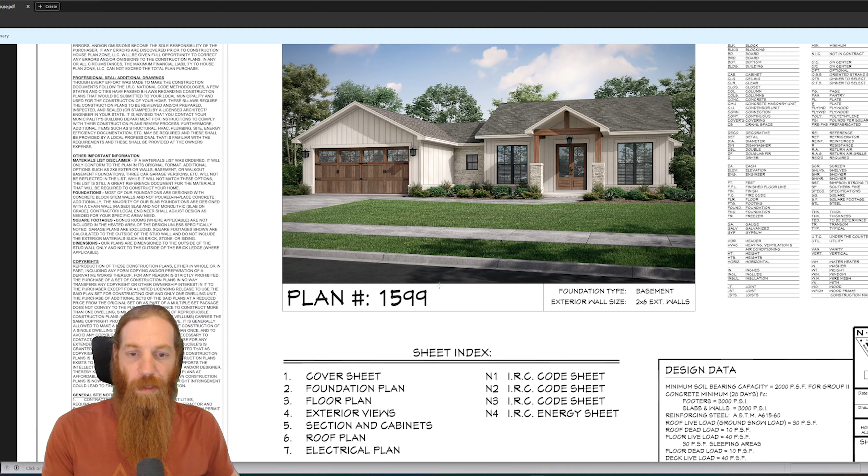That's the other reason I like building all this in SketchUp before actually building it for real—I'm able to make or identify any changes I want to make to the floor plan ahead of time. For this particular home, it's got a bump out on the side for the bathroom on the main floor. Let me go to the floor plan here—you can see it's got the bathroom with the tub essentially inside that bump out.

I'm not a huge fan of that. I mean, it adds a little bit of depth architecturally to the side of the building, but I'm not real concerned—the side of the building is usually going to be covered up with landscaping, bushes, trees, that sort of stuff anyway. And it's going to be a lot cheaper for us just to build that as a flat wall.

So that's one change I've already made. Instead of doing the bump out with the foundation, this is going to be a straight wall, coming all the way out to the same distance the bump out goes to—a total of 61.5 feet from one end of the building to the other. So we're going the full 61.5 feet corner to corner. This will all be a flat wall, meaning we'll have a little more space on the interior, which is always nice, and it'll be a little cheaper to do the foundation since you don't have those corners to deal with.

It's simpler for framing the floor, simpler for framing the walls, simpler for just about everything. So you're reducing costs there by actually going a little bit bigger, which is really nice when you can pull that off.

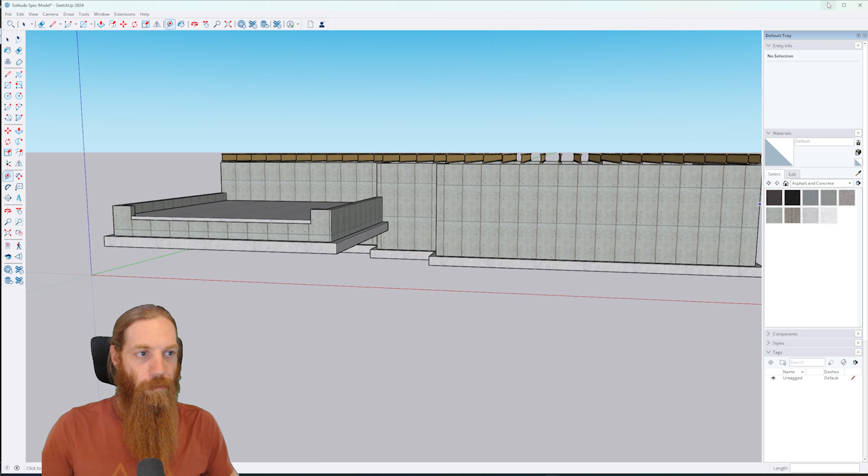So with that said—last time we were doing this, oops, wrong one—last time we got this far. I basically showed exactly what I do for the foundation here to get started. Just like in the real world, when building a house virtually, I think it's best to start with the foundation, because everything gets built on top of it. So that's what I always start with.

We've got our footings in here, as you can see. The garage level is going to be a different level than the rest of the home because this is a basement foundation—we're doing 10-foot ceilings here. So you can see we've got our foundation walls. We have the slab on the inside for the basement, and we also have the slab in the garage.

The garage has its own little stem wall, its own footing, and then of course the slab there. We didn't model out any of the rebar - I may come back and do that later. When I'm just getting started on a build like this, I'm trying to get an idea of the rough layout. I don't want to spend a lot of time going into details like rebar placement, anchor bolts, and those kind of things. Those details are best done towards the very end once you know for sure what your foundation layout is, because this still might change.

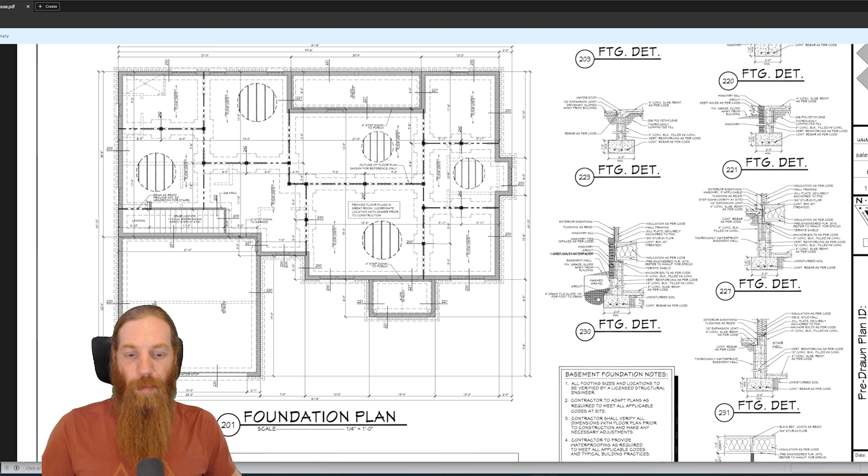A perfect example of that is that so far we do not have the bump out in the back, or I guess a bump in, for the foundation for the back patio. Let's go back to the floor plan. You can see right here they have this wall coming all the way across, a little stem wall that they do, and then all this was going to get poured in for a slab for their back patio. I'm not going to do a slab patio.

As you can see, we are building this up higher out of the ground. The grade level is going to be essentially where the garage slab is, so our main floor level is going to be a good 4 or 5 feet above grade. So I'm not going to do a poured concrete patio in the back. Instead, it's most likely going to be a deck that I will extend out further than what it shows on the plans, making a nice covered porch or deck area with a gable roof over top.

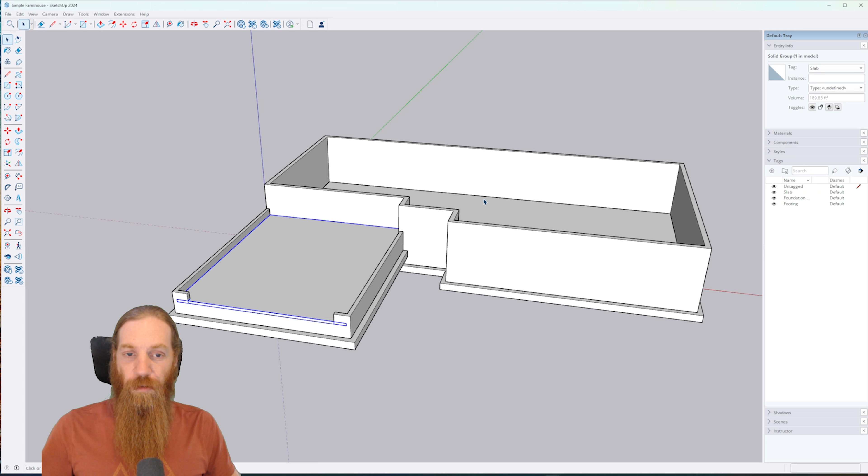We'll work on all that later, but we still need to fix this little foundation part for the floor plan. We do need to follow this part that bumps in, because that's essentially the exterior wall of the home. We could switch that around and add more interior space here, but we'd lose the patio there. I kind of like having a little inset patio area on builds - I think it's a nice feature. So we're going to keep it, but we need to fix our foundation wall to include that little bump in. So we need to get our measurements.

First things first, let's go off this corner over here. We're going to come over 12 feet 2 inches. I hope you guys can see that okay - it's a little small, let me zoom in a bit. I think that's better. We can go in a little bit more there. Okay, so you can see I got my measurement here on the plans, 12 feet 2 inches. So I'm going to come in 12 feet 2 inches from the outside corner, and that'll go to the outside corner of the foundation wall where it bumps in.

So let's go back to our model. We're going to pull out the tape measure by pressing T. I'm going to measure from the exterior wall - we're going to come over 12 feet 2 inches. If you didn't see the first episode of this series, go back and watch it. I explain a lot of how to use the simple tools like your tape measure, line tool, and the stuff we used to build this foundation and get it started. I explained how all that works in the first episode, so I'm not going to go into as much detail here.

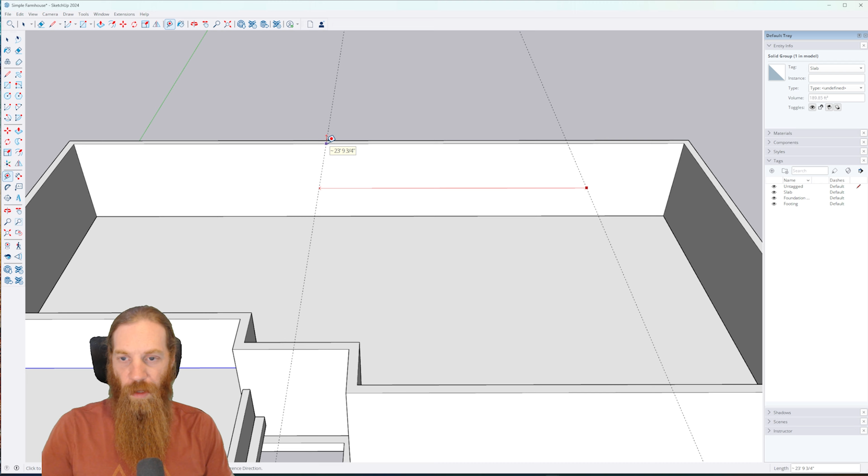Okay, so now let me go back to the plans. Let's just take, so 20 feet 4 inches, we need to come over 20 feet 4 inches across, and that's going to be the interior dimensions for that little bump in. So what did I say, 20 feet 4 inches, right? Let me see.

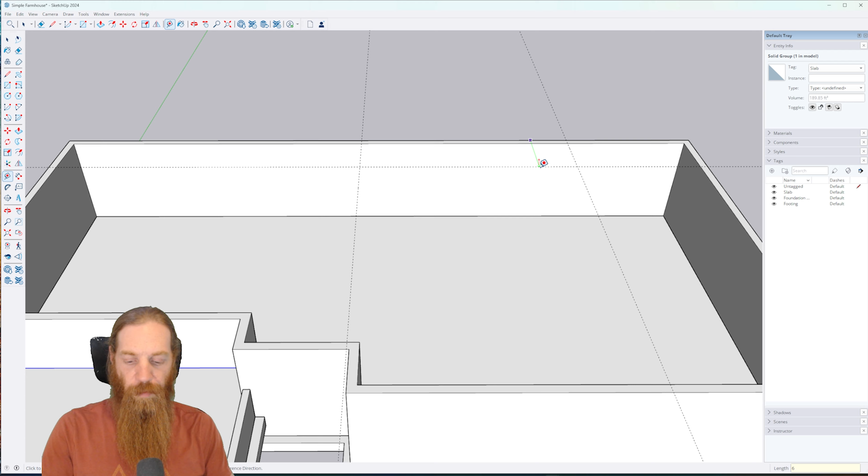20 feet 4 inches. Now the depth of it, or the distance that we're coming in, is going to be 6 feet from the outside of the foundation wall up here to the outside of the foundation wall down here. So we can go ahead and do the 6 feet there. From the outside of the foundation wall, we come down 6 feet, and that's going to give us our dimensions for this little bump out section of the wall.

Now, in order to actually change this, we're going to come in here, hit the line tool. We're going to connect it to our marker that we put on there, our reference line. And then we're just going to follow the blue axis down, so you can see it snap to the blue axis because the line turned blue. And then we're going to bring that all the way down to the footing, actually, is what we want.

So I don't remember if it's default or not. You can see I can hide the slab and actually the footing as well. It'll hide everything that I'm not currently editing. So right now I'm editing the foundation wall because I double clicked on it to go into edit the foundation wall. You can tell because if I hit P for push pull, it highlights that whole wall surface, meaning that I'm editing the wall itself.

So what we're going to do here, I don't remember what the default key bindings are. I may have changed them slightly, but mine is set to Control Q. It's for hide. Let's see if I can find it real quick. I never changed these things. I think I set this up when I first started. Hide is H, but that's not what I'm looking for. So let's go to File.

Do we have like preferences or something somewhere? Okay, one second. Let me see if I can find it, and then I'll be right back.

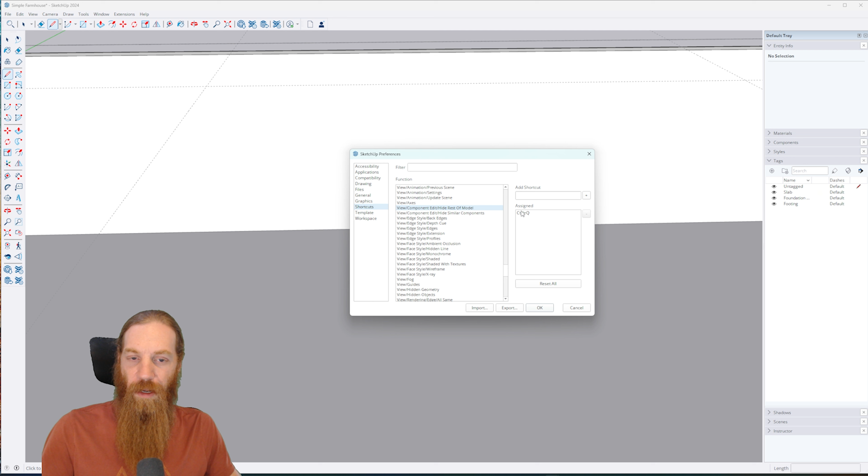You can see I assigned it to Control Q. So anytime I hit Control Q, it'll toggle that option. So let's go ahead and hit OK there. So right now, let's go ahead and get back out. I hit escape, I'm all the way back out to the main model, so I can select the different things, I have the slab, the foundation wall, whatever. So double click on the foundation wall. Now I'm editing the foundation wall. I hit Control Q. It hides everything else except for the foundation wall.

Now the only problem with this is I made my reference marks out here in the main model outside of the foundation wall. So in order to see those marks, I need to place the start of the line there before I hide everything. Now I'll hide everything, bring it straight down following the blue axis. Okay, and then unhide so I can see the reference marks again.

I'm gonna do the same thing over here on the other side. Hide everything, snap it to the blue axis. Where is it? There it was. Whoa, way over there. Okay. Sometimes the camera perspective can make things look a little wonky, so it could take a second to find the axis that you're trying to snap to. But anyways, let's go ahead and do that.

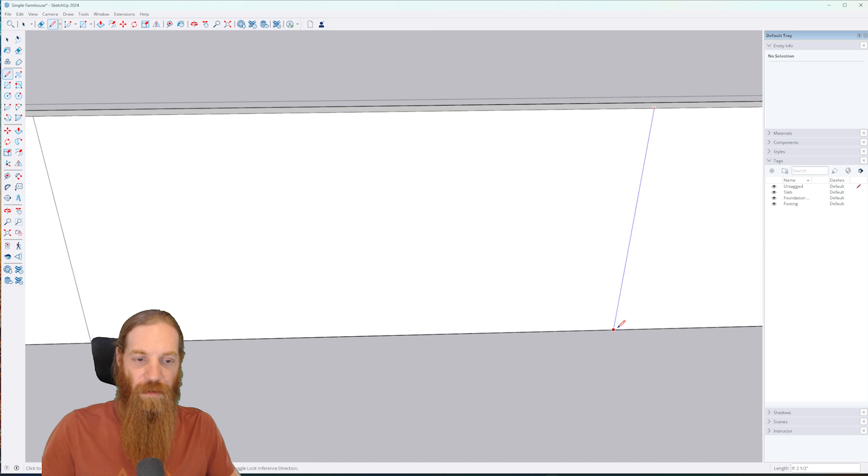Now we unhide everything, and we now have our exterior of the concrete wall for our little alcove that we're doing here. So what I need to do then is come 8 inches over from that, right? So let's come 8 inches over on the red axis, because that's the thickness of our concrete wall.

And we're now going to add another line, and we're still editing inside the foundation wall. So if I press P, you can see it highlights those, meaning that I'm editing the foundation wall itself. So I'm going to do a second line on each side. Oops, let's undo that, I forgot to hide everything. And this time I made the reference lines inside the foundation wall model itself, so I don't need to unhide in order to see those reference lines. Now I can unhide everything.

We are going to now use our push-pull tool. You can see that because we divided those sections up, we can now pull just the sections that we want. So I'm going to pull it out to there. Now that is the exterior of the wall, so we need to go another 8 inches to get all the way to the interior.

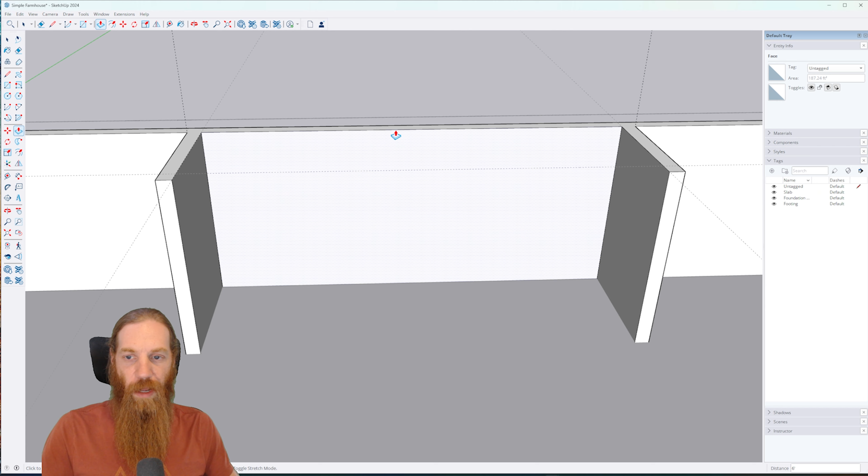Now when I pull this one, I could type in the measurements just like I did on the other side, or what I can do is put the cursor over here on this one, and you can see it's going to bring that one out to match whatever the distance is for the face of this one where I'm putting the cursor. You can also put it on the edge, and it'll match that edge. But anyways, it's just a way to speed things up a little bit when you're trying to match the same distance as something else. So we click on that, and now we have both of our bump ins from the foundation wall there.

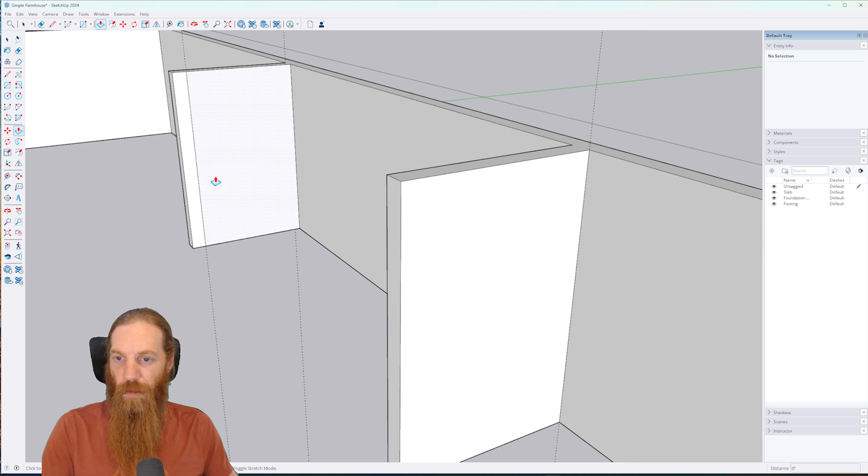So we need to do one more. We're going to go 8 inches here for the thickness of the wall, and we're going to press L for our line tool. It's going to snap on right there. We're going to hit Control Q in order to hide everything else, bring it all the way down to the bottom of the foundation wall. That's very important because that completely divides the sections and allows you to grab just that section with your push-pull tool. So now we're going to pull that out, and again we're just going to go straight to the edge or the face of this piece of foundation wall here, so that it will match that.

So now we have our complete foundation wall for the inner part. We can go ahead and delete this line on here because that's not needed anymore. I always just go ahead and look for other little lines that are left over that I don't need anymore to delete, because the cleaner the model is, the easier it's going to be to work with going forward. When you get a whole bunch of random lines and stuff in your model, further down the road, it could become more complicated for editing and adjusting things. So that was the only one, I kept going when I should have stopped.

Let me zoom out a bit. When you get something like that and you're too close, just zoom back out, and then you can move the perspective back to where you want it.

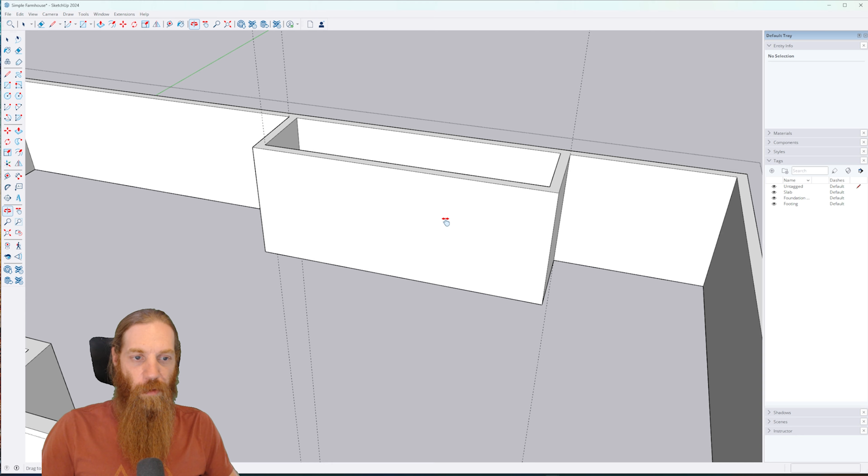So now that we have that, the other thing we need to do, let's pull our line tool out because we're still editing the foundation wall. So line tool, we need to remove this part of the wall out here. So we're going to follow the green axis from each of these points at each corner. That's going to separate that section out, and then we can just lower that on down.

Now, what I think I'm actually going to do here is we're going to leave this as a stem wall. Well, let me think. Would that be better than doing piers?

No, we're not going to leave it because I am probably going to go ahead and build it with a deck that extends out like another 12 feet or so from that exterior wall. So we're going to go ahead and remove this completely. Do not need it. We're going to go ahead and...

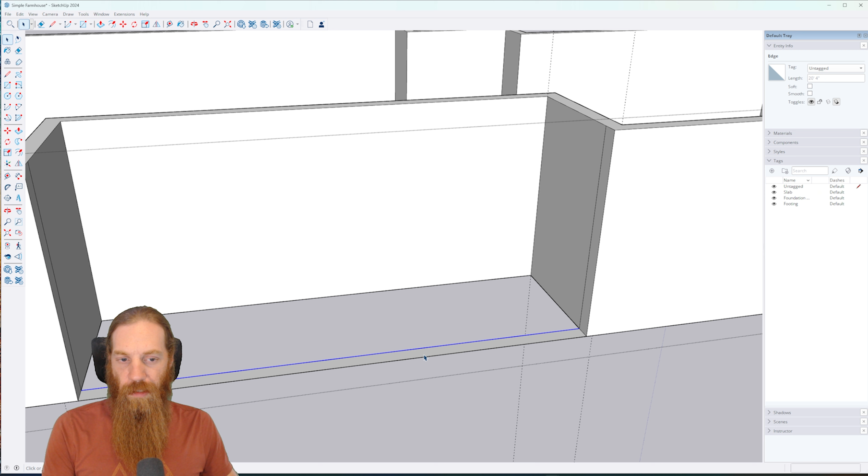So we went all the way down to the bottom, but it left a little bit there for some odd reason. Usually when you go all the way down, it will remove it. But anyways, we can also remove it just by hitting spacebar for our cursor. Click on one of the edge lines there. We will delete that. You can see it's only deleting the cutout part, so we're okay there. Same thing with the other line. It automatically deleted the face area between the two lines once we deleted one of the edge lines. And so now all we have to do is delete the other edge line, and that section is completely gone.

And now, just like before, I'm going to clean up this model a little bit. If I can get my cursor in there, I'll just delete these lines as well because we don't need those. Okay, so now we do have the alcove built in for the back porch area.

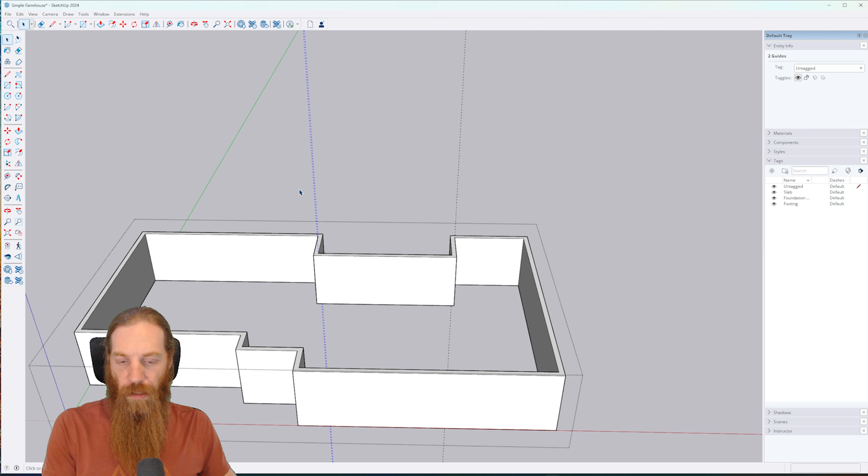And then let's just go ahead and delete these reference lines. We're not going to need those anymore. Hit Control Q to unhide all the rest of the model that we still had hidden. And then I'm just going to click outside of the foundation wall. We're going to go ahead and delete these, we don't need any of these anymore. And there we go, the slab is the only thing left. Well, and the footing, so now we've got to edit those.

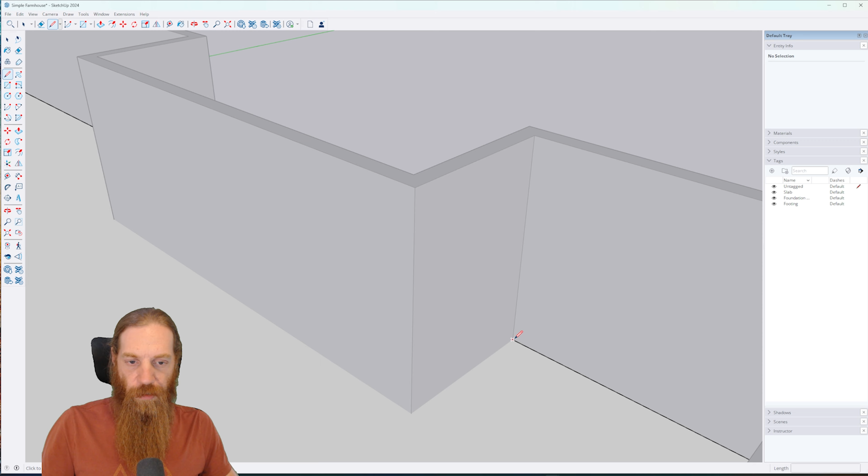So let's go ahead and go into the slab by double clicking on it. And again, I'm just going to take the line tool and follow the outline of this alcove. Click onto the corner, I can't tell if it's getting in the corner or not, I'll zoom in a little bit. There we go, right there. And then bring it out to there to connect.

And then all we have to do is come over to this side, press P for push pull, and push that down. When it says offset limited to -4, that means you've hit the bottom, and it should just go ahead and remove it as soon as you click on that. So now that is completely removed. We can look at just the slab and you can see that it's no longer there. So we're good on that.

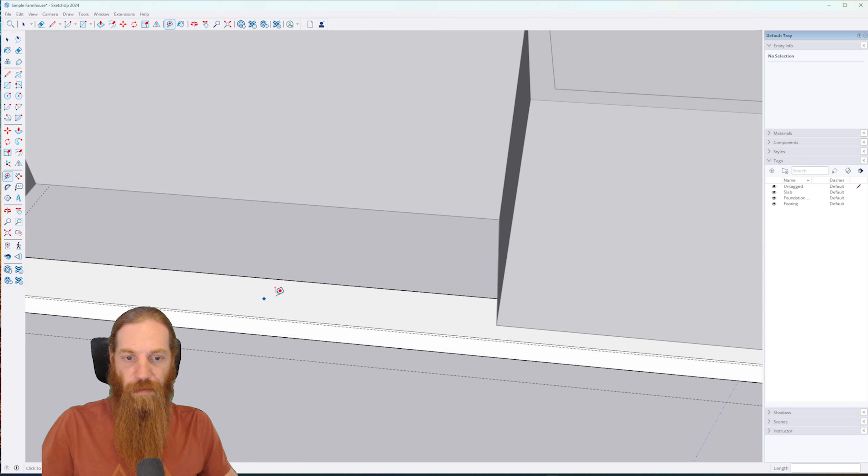Now the footing, we do need the footing to come out. So let's double click on the footing to go in. This needs to come out 8 inches because we had 8 inches of exposed footing on each side of the foundation wall, so we're going to come out 8 inches on both sides. And then we're going to use our line tool just like before and draw our line across there. Same thing right here, draw the line across.

P for push pull, and we're going to... wait a second, why didn't it remove it? See, it's weird, sometimes it says offset limited so it should remove it, but it did not. So we're just going to do what we did before, we're going to delete, and we still have all the rest of the footing there, which is perfect.

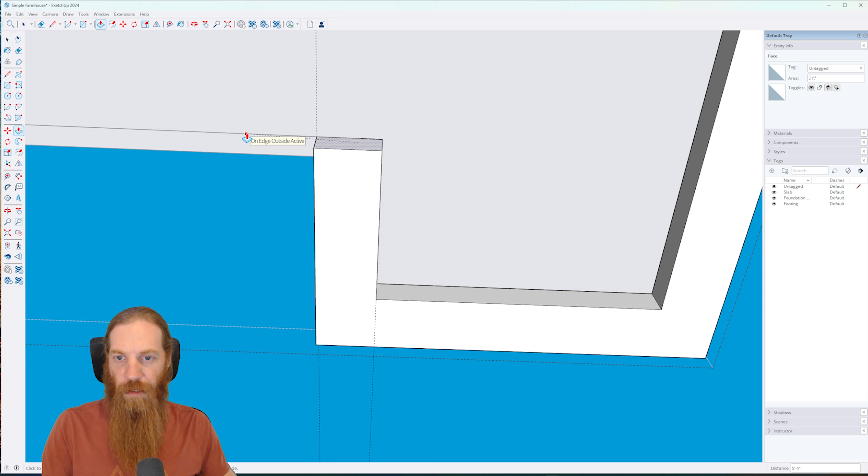Now we need to bring this out. So what we're going to do, we know that these footings are 24 inches wide, so from the end here I'm just going to go 24 back, and we're going to put a line right there. And then we're going to push pull, we're going to pull that out. So we want to go all the way to the edge, the inside edge of the foundation wall. And then we're going to go another 8 inches past that, right? Okay, and there we go.

And then let's go ahead and do another reference line straight across here on the green axis, and we're going to go 24 inches again. Hit L for our line tool, draw the line there, and then P, push pull. Okay, and we need to bring this all the way down to here, and then another 8 inches, just like before.

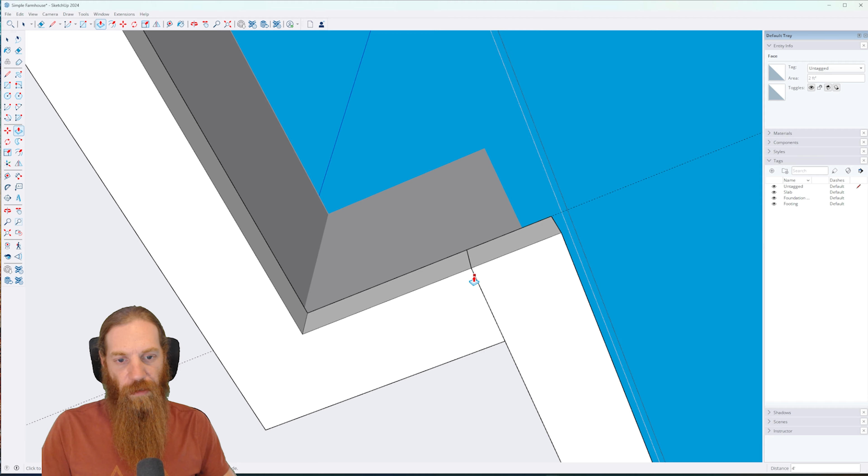Okay, and now we already have our line here, so I'm just going to use that same line. We're going to do our line tool coming down from that to give us our 24-inch wide footing there. And then we're just going to push pull all the way to the edge of this one by clicking it onto the edge of this footing over here, basically. You can also turn the camera angle around and tell it to go to the face of that footing, and it's just going to match where that is, and you can see it automatically merged with that footing.

So now we hit spacebar for our cursor. We're just going to select that line, delete, and I think there's just one more line somewhere, maybe not. Nope, that's it. So now the footing is complete under that section of wall just like we wanted it. At this point, we're going to remove our reference lines because we don't need any of these anymore. And there we go, so we've got the footing and the slab and the foundation wall all completed.

We're ready to go. Now, last time I mentioned that the foundation height is going to be 10 feet, and I want to match the height to where I can use pre-cut 10-foot studs. Yes, the basement slab probably won't be exactly flat.

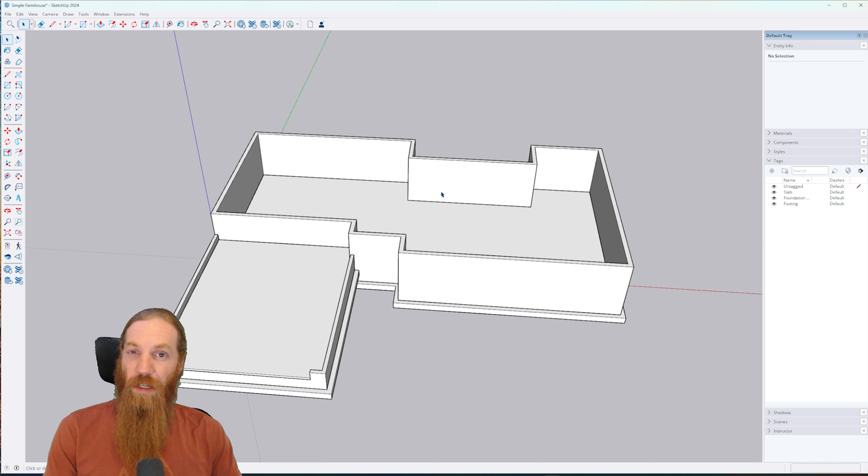You may have some dips in a couple places that throw you off an eighth of an inch or even a quarter inch in some spots, so you won't be able to use pre-cut studs everywhere if you want to keep the top of your wall perfectly level. But for the most part, assuming a perfect environment since we're doing this virtually on the computer...

We're just going to measure out for pre-cut 10-foot studs. If you're not familiar with pre-cut studs, basically they're pre-cut to make the total wall height or ceiling height a certain length. There's 8 foot, 9 foot, 10 foot, probably even 12 foot pre-cut studs. I don't know that I've ever seen 12 foot, there might be, but 8, 9, and 10 foot are fairly common.

Now these studs are not measured exactly — a 10-foot pre-cut stud is not going to be exactly 10 feet, and an 8-foot pre-cut stud is not going to be exactly 8 feet, because they reduce it a little bit. They take 3 inches off for your top and bottom plates.

This does become a bit of an issue because technically you have 3 plates — one bottom plate and a double top plate, typically. So that's a total of 4.5 inches. You should be taking off about 4.5 inches, and they're also accounting for things like drywall and flooring. You want your drywall to be up off the floor a little bit.

You don't want, when you lay a sheet of drywall up on the wall, for it to be tight down to the floor — you'll have a gap at the bottom. So it's accounting for all that kind of stuff. But basically...

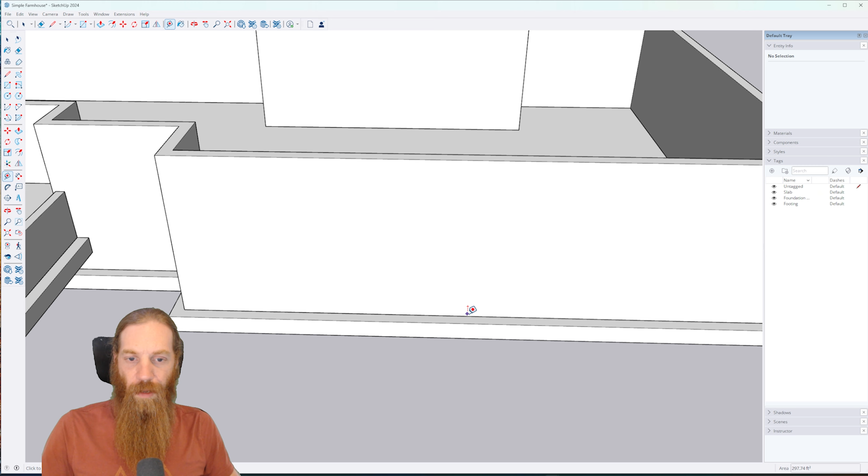I think when we actually did our wall, we want to measure from the top of slab, right? Because that's where you're going to be framing on top of. So right now we have 8 foot 10 and a half. That is not even close to where we need to be.

So we're going to edit that, push pull. Oh, I should probably put a reference mark first, huh? So we want to go up, what did I say? 10 foot, we'll just do 116 and 5/8. Okay, so that's going to give us our stud height. And then on top of that, so let me go to that first.

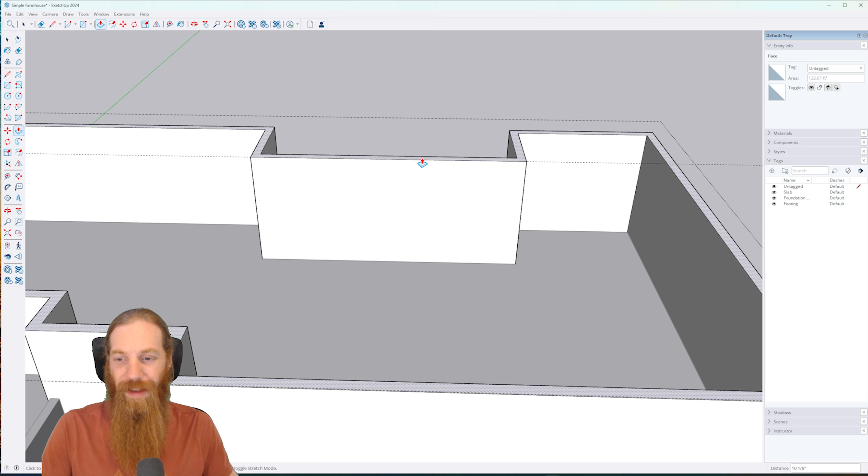So that raises the whole thing up to our stud height. That's fine. Now on top of the stud height, we also want to make sure that we have room for our plates, right? So we're going to have, was I doing a 10 foot on this or a 9 foot ceiling? I feel like we were actually doing a 9 foot ceiling, weren't we? Because now that I look at it, 10 foot is going to be pretty tall. I think we were doing a 9 foot ceiling.

I'm just thinking 10 because that's what the build I'm currently doing is. So let's go to a 9 foot stud. What would that be? Let's just go ahead and put in length, and it'll tell me the exact length. 104 and 5/8. Okay, so let's go 104 and 5/8.

So let me hit Control Z. We're going to back up a little bit here. Take the reference line away. Take out our tape measure by hitting T. From the top of slab, we want to go up 104 and 5/8.

And then from there, we need to add in 3 inches for our plates. I'll explain why in just a second. But let's go ahead and go up. Let's do this. P for push pull. We're going to lower the wall down to this line to start.

Now from there, we're going to come up 3 inches. The reason for that is because we're going to have a sill plate that sits on top of this wall, and on top of that sill plate are going to be our floor joists. So our ceiling is going to be on the bottom of those floor joists, which means you're going to have a 1.5 inch, one 2x material, or your second top plate, is going to be above the concrete wall, right? Because it's going to be at the same level as that sill plate, essentially.

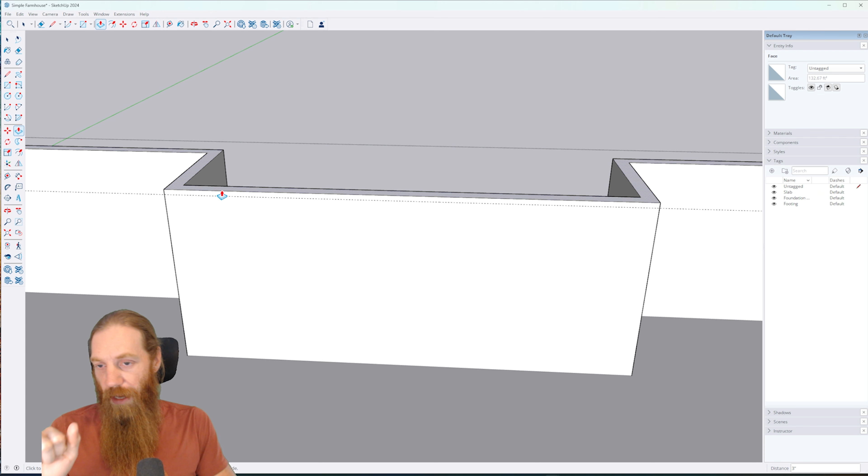So we're only going to bring it up another 3 inches from that. And then let me think. Oftentimes you kind of have to think about all these things when you're planning this ahead of time, right? We could come back and adjust all this later if we need to. But essentially when I'm doing ceiling drywall in a basement, I like to do strapping on the bottom of the floor joists and then attach the drywall to that strapping. I don't really like putting drywall directly on the bottom of floor joists for various reasons: noise, cracking, running electrical, or whatever. It becomes a lot easier when you have that strapping there. So there's a few different reasons why I like to do that.

But that strapping is just 1x material, usually 1x4 or 1x3. So it's going to be 3/4 inch thick, right? Now that's going to lower that ceiling another 3/4 inch then. So let me think about that for a second. So we're adding that to our height as well.

Yeah, so really I would want to add a 1x plate to all of our top plates. So basically a third top plate in order to match that if we're trying to continue using pre-cut studs, right? I'm just trying to do the math here to make it all work to where we can use pre-cut studs in the basement.

We're not going to worry about that today. Let's do this as just a simple build. We're not going to go complex with anything like doing the strapping for the drywall on the ceiling. Again, that's probably the better way to do it. And if you're going to, then you probably want to plan ahead for that. And the way that I would do that is by having your walls built using your pre-cut studs.

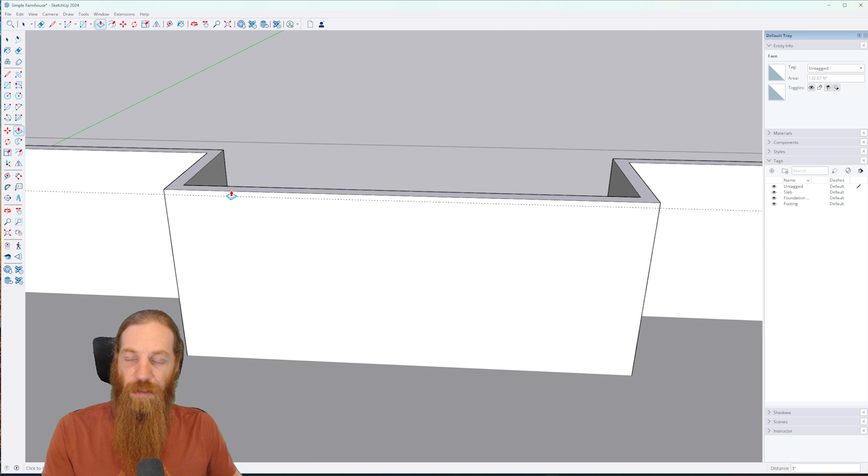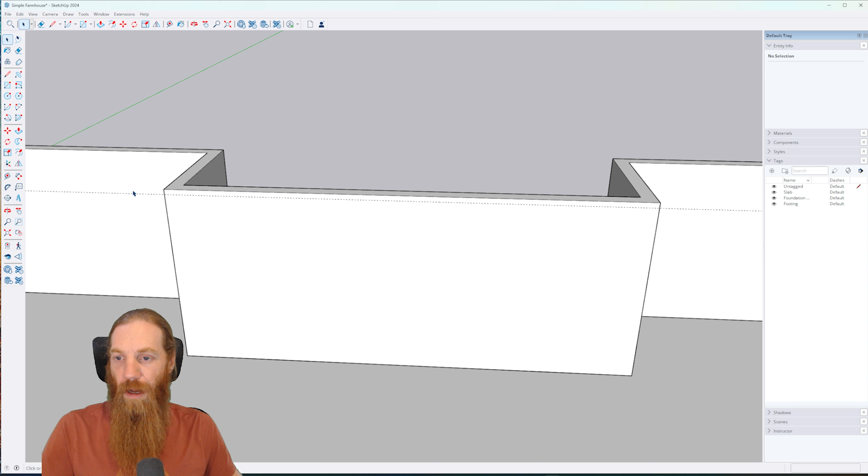You'll have your 3 plates, right? A bottom plate and 2 top plates. And then on top of that double top plate, you're going to add one more 1x top plate. So that when you're doing your ceiling and everything, your ceiling gets dropped by 3/4 inch because you're doing 1x strapping there. And that way everything still works out math wise so that your sheet of drywall fits on the wall. To keep things simple for this model though, I don't think I'm going to do that. If I change my mind later, we can always come back and change it. So I'm just going to leave it right where it is right now because that's where we want the wall height to be in order to use those 9 foot pre-cut studs.

I forgot to remove this reference mark, so we're going to remove that real quick and back out of the foundation wall. Now we should have exactly the height that we want there on the foundation wall.

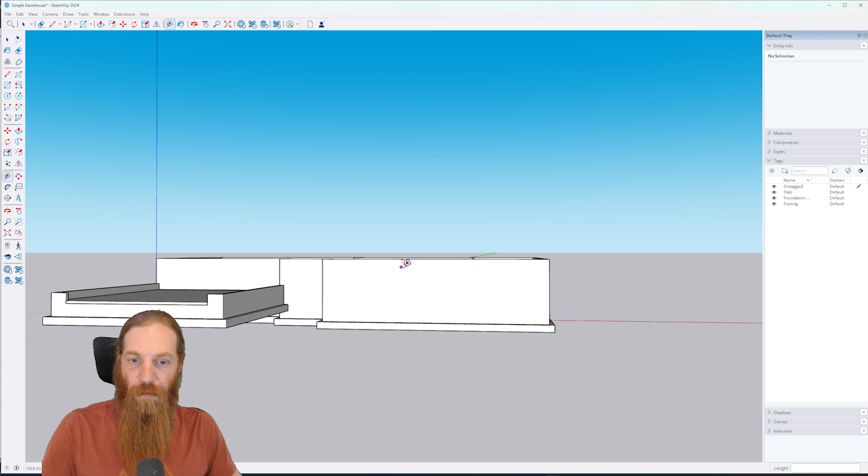Because of how high up ours is with the model we're doing - right here, our entryway is going to be, like I said before, 4 or 5 feet above grade - I don't really want to do a concrete porch. So we're probably going to frame it as a deck, a little landing here at the front, covered area. It's all going to be framed out with lumber instead of concrete, so I don't need that little stem wall section in the front there. We're not going to worry about that too much.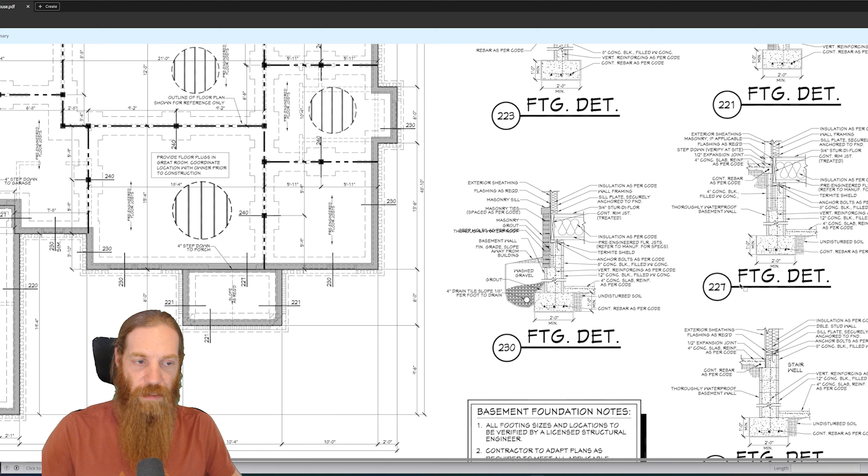Yeah, this one keeps it all pretty simple. It's basically the same footing design for all the footings, except for the interior footings, which is this top one you see up here. I mentioned last time we're going to worry about that soon, but we're not doing the interior footings just yet because I don't know what the layout is going to be for the interior.

As far as their suggestions, this is their layout for the interior of the basement, or where they're going to put the footings for the load-bearing walls in the basement. I don't like that. I looked at it for a few minutes trying to decide if this gave me anything I could work with as far as an actual basement layout, and it really doesn't. I would say you could have this be like a closet or a bath - I'd probably make this a bathroom up in the top corner.

If we were going to follow this layout, this would be like a bathroom up in the corner because you have the plumbing from the bathroom above already running down from above, so you can easily add in a bathroom right there. I'd probably have all this space open, and you'll just have to put a beam in across there because that's going to be carrying a load from the joists. But you could have all this open as like a game room area.

Then come over down here - I'd probably do a room here, have a hallway kind of right about here. You could have another room here, either a bedroom or like a media room right here. Then this hallway comes all the way down the hall, turns the corner, bedroom. You could have another bathroom here because the bathroom above gives you easy access to the plumbing. That's basically more or less the layout that I would go with.

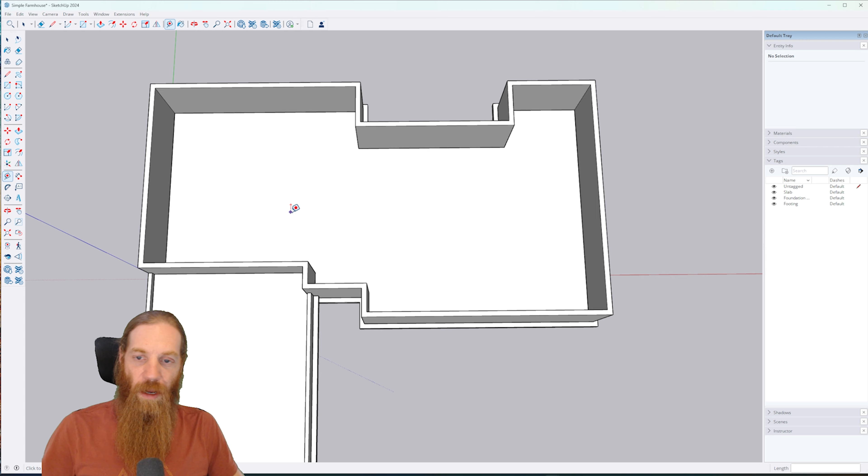We are going to have walls in this basement—it's not just going to be one big wide open space. So there's no reason to do clear span with the joists. Since we're splitting this up into rooms anyway, we can easily do some interior load-bearing walls. So basically we need to figure out what we want for the layout.

Now, the one thing that's not going to change regardless of what we decide—it could change, but I'm not going to change it—is the stairs. The stairs are where they are, they're not going to move. We're basically going to follow this. I could make them a little wider, I suppose.

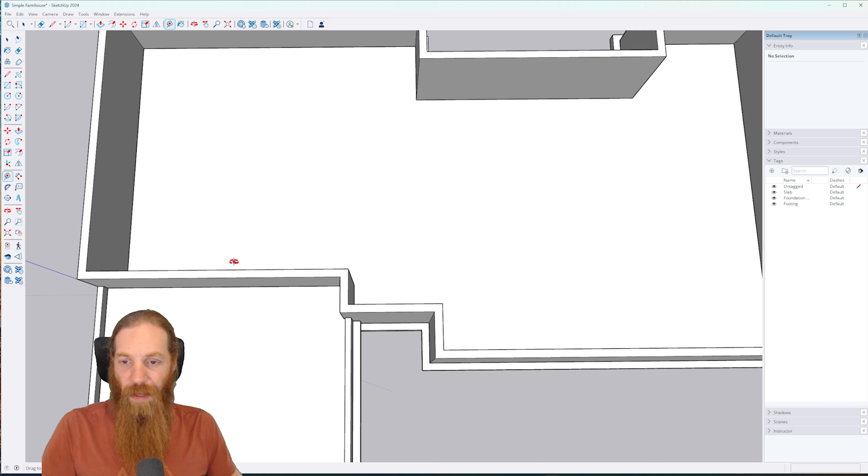I'll have to look and see how wide they are currently. Yeah, you really don't have much room. I guess you could bump this separation wall between the garage and the house out a little bit if you wanted to make the stairs bigger. That's a possibility—we'd have to move the whole foundation wall though for that. So definitely something you want to plan ahead of time and not decide at the last moment, but that is a possibility. We could do that if we wanted to.

Now let me go back to the plans real quick. I want to see, what does it say—does it tell me the stairs width? It shows 4'4" right here. That 4'4" is from the interior of this wall to the exterior foundation wall. That's the only measurement it gives me for the width of the stairs. So 4'4" and then subtract 8 inches because we have an 8-inch thick foundation wall—that's going to put you at 3'8". That's not bad, that's not too bad.

Once you have your drywall on there and everything, you're going to be about 3.5 feet. 4 foot wide is really nice for stairs, but that gets pretty wide, so I think I'll be content with 3'8". Let's go ahead and put that in—that's going to be our width from the interior foundation wall to the interior of the stairwell wall.

So we're going to come in here with the tape measure tool. I'm going to do these measurements on the slab, not in the slab so I'm not double clicking to edit it, but just going to mark these measurements. Let's turn the camera around this way, that's a better angle. When I'm working by myself I'm used to looking at things from weird angles, but for you guys watching it's probably better if I keep it right side up.

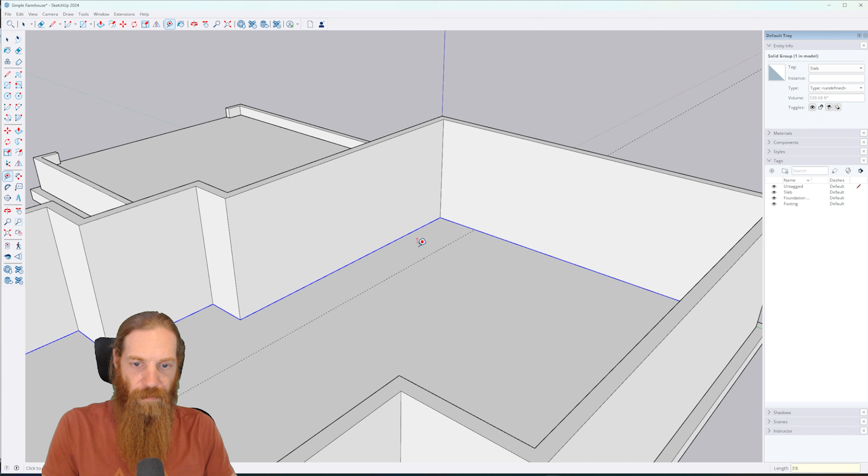So we're going to come out from that, what did I say, 3'8". Now that should be the framing, right? That I would imagine is not including drywall with that measurement.

So let's go ahead and design it that way. That's the interior of the wall, and then of course it's going to be a 2x4 wall construction, so we're going to come over another 3.5. That's the outside of that wall.

Does it tell me how long the steps are here? 17 equal risers. It says 11'8" from the interior to the exterior of the foundation wall, right? No, sorry, the 11'8" is just the stairs, so to the bottom step. So from bottom step to top step, which is counting as the interior of the wall there, you have 11'8". Then you also have the 4'10" from the exterior foundation wall there to the bottom step.

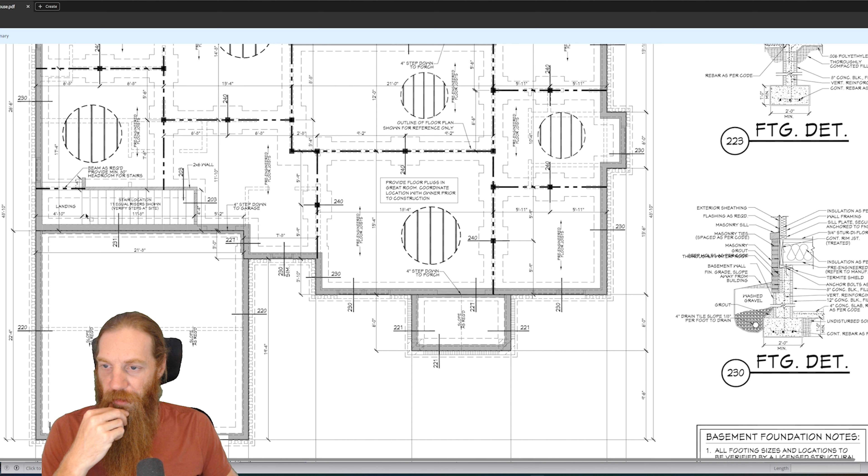So let's go ahead and do that first, the 4'10" there for the bottom landing area. It needs to go from the exterior, so I'm going to click over on this side and then we'll measure. Oh yeah, okay. What did I say it was? 4'10". So minus the 8 inches, we're going to go 4'2".

4'2", okay, that's where the bottom of our steps are. And then the steps themselves were what, 11'8"? Okay, so 11'8", that's going to be the top of our steps, will end up right there. And so we wanted 3.5 for our 2x4 wall, that's going to go right there.

Now we will be verifying this later on when we actually build the stairs, we'll verify that that's actually the correct length. I'm assuming it's using standard stair dimensions, well, I think it actually tells us on there. Let's see, 17 equal risers. No, so it doesn't tell us what the tread depth is. Maybe it's somewhere else in here, stair data. 10-inch treads, okay, so you have 10-inch treads.

So we'll use this info, and they're going with a 16-inch subfloor on this. Really? That seems like a lot. Like I said, typically you could use 12-inch I-joists for something like this and it would work out just fine, depending on, but I'm assuming our spans are going to be like 15-foot spans at most, probably more like 12-foot spans. We'll figure that out later. I'm going to get into the floor framing and how I figure that out when I'm designing this.

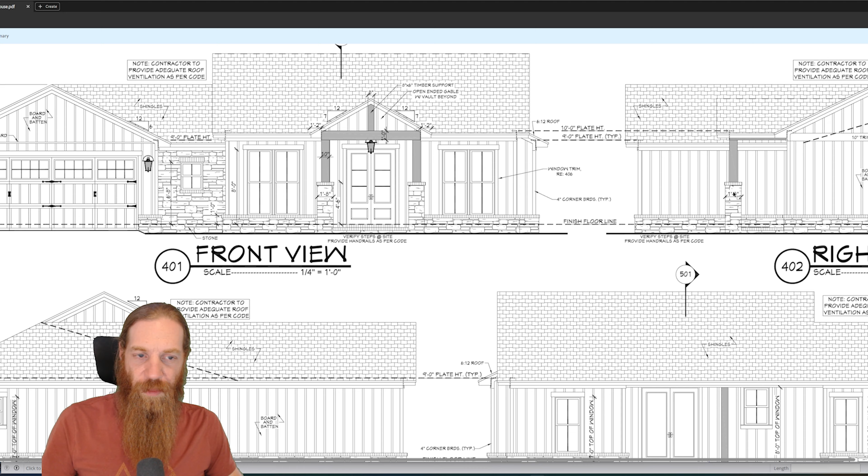If it's not already called out by your engineer or architect. Although in this case, I don't know that I would trust what the architect is doing. They're also using a lot of materials or methods in this plan that I don't plan on using. For example, the roof is all hand-cut rafters, like you can see right here. I'm just going to use engineered roof trusses, way faster to install, way more precise and accurate as far as measurements and everything. So I'm not doing hand cut rafters.

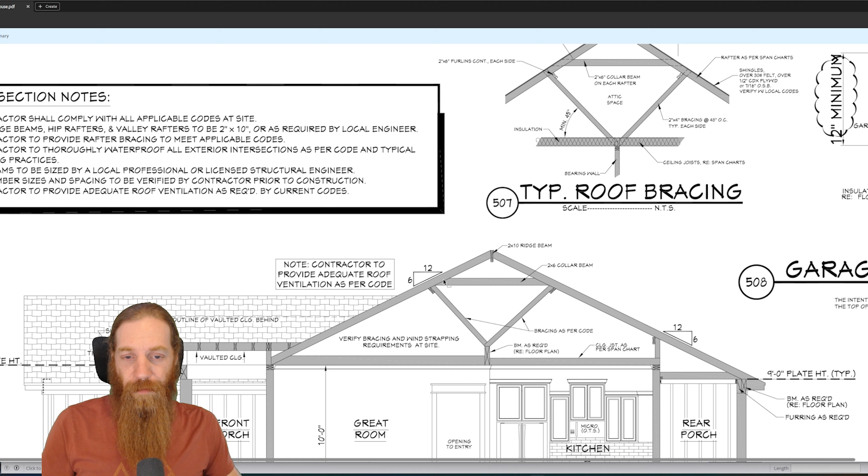If you did want to do hand cut rafters, this is showing you how you would do it, more or less from the architect's perspective. Of course, you do want to get engineering done on that to make sure it's going to meet the engineering that you need for your area. But that's not really important for us right now.

I do find that interesting, the 16-inch subfloor. So we'll probably end up redesigning those stairs a little bit from what they call out here, so that the length of the stairs might end up being a little longer or a little shorter. If they're going with a 16-inch subfloor, then I'm guessing it's going to be one step shorter possibly, which is fine, if it works out that way, so be it.

So now we've got our stairs basically in place for where they will be. Now they show a door here at the bottom, and then the wall kind of does a little bump out thing here at the bottom, right?

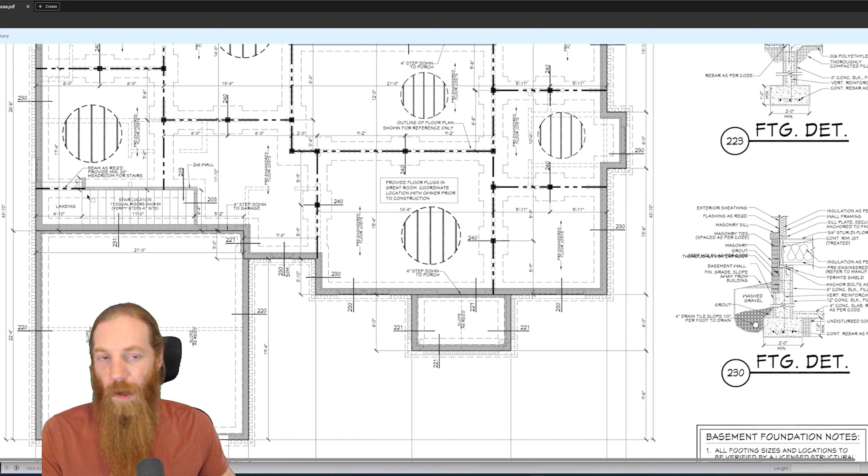Do we need to do that? Not necessarily. Oh, this actually, so their stairs, the reason they have that is because they actually have a landing down here and then one more step. I can see that now. It's not immediately obvious because this is kind of a busy area on the plans, and they're just lines, so it's a little tough to see. But they do in fact have this as a landing and then one more step here coming out, and that's why this turns. I'm guessing this is probably just going to be your stairway railing, instead of a full wall, although you could do it as a full wall, of course.

So the real question is, do we want to do that? We might. So I'm just going to leave it like this for right now though, and we'll figure all that out later.

Okay, so now the next step is we need to figure out our layout. We essentially have the stairs in place. Let me think about this for a second, and I'll be right back with what I've come up with, and we will see how it works out.

Okay, so I think I've more or less figured out what I want to do here. We are going to have a couple load-bearing walls in order to accommodate the floor joists, right? And I think for the load-bearing walls, I'm actually going to just go ahead and frame them with 2x6. 2x4 should be just fine as well, but I do like to have 2x6 in there, and we might need it for some plumbing anyways in a couple places.

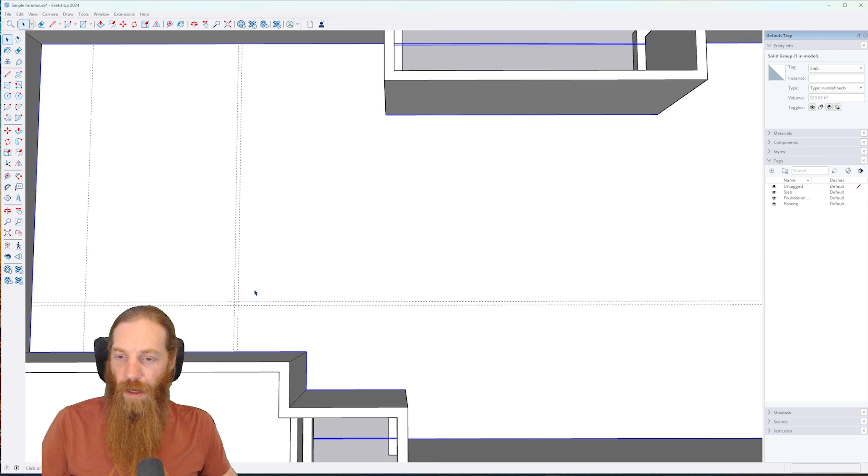Well, let me think about that. Do we want to go 2x6? I think I would. I think I would. So this wall here is gonna be a load-bearing wall, and I am gonna continue it all the way down. I'm gonna go ahead and extend this out to 5.5 inches instead of 3.5 inches. So that's a 2x6 wall there.

Let's start up here in this corner real quick. Basically I'm going to do what I was talking about before. We're going to make a bathroom here in the corner because you have the bathroom up above that has plumbing coming straight down from there. So you're going to be able to easily put a bathroom in right here.

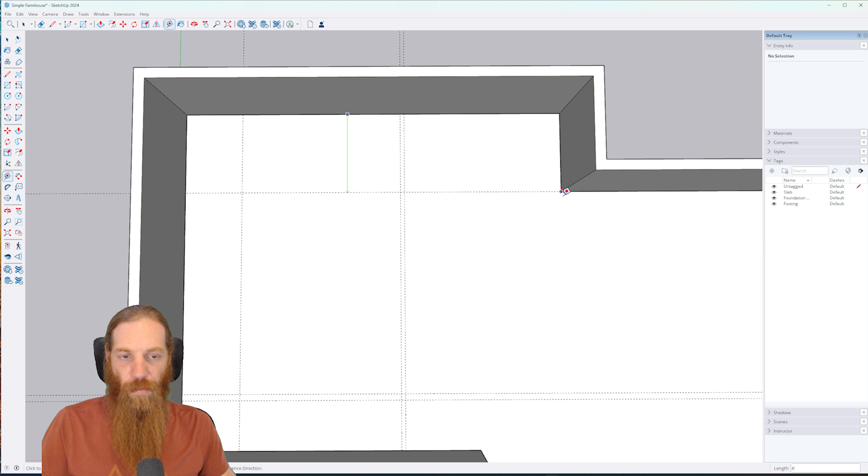And then I think for the other side, well, first of all, I think what I'm going to do is just continue this wall straight out. So what I want to do, bring this out. We're going to bring it straight to there. Although we will also have the interior framing. Do I want to go a little bit further? That's what I'm wondering.

Because we're going to have our gap. Do we go 2 inches of foam board, or do I just go with a 1-inch foam board? I think 2 inches works best for a basement. So, yeah, I could put it here. Let's just go ahead and put it here, though. I may end up moving it further down the road, but let's go ahead and put it there.

And then I'm going to come out 5.5 inches because, again, this is going to be a load-bearing wall, so now my spans are much more manageable. So the span for this room here, or from one load-bearing wall to the other, you end up with 15 feet and a half inch.

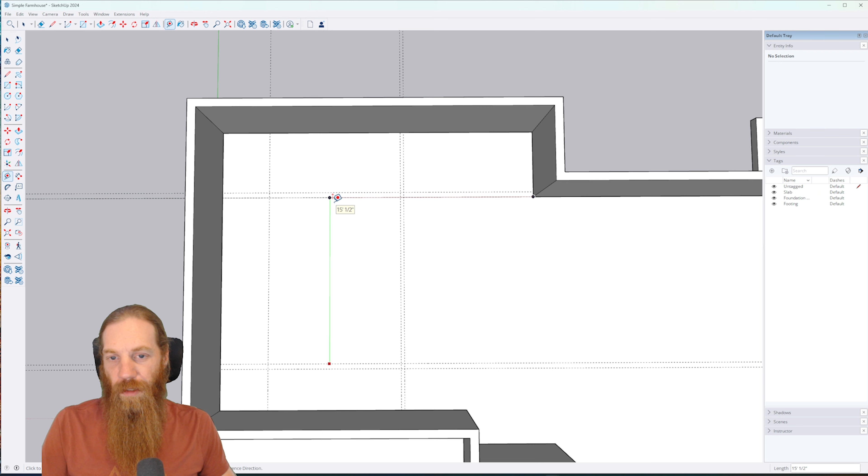Now, we'll look it up in a minute. I'll show you how we double check this when we design our floor joists. But I think 15, if I remember right, just off the top of my head, I believe 15 foot is going to work okay for our 12-inch joists. And then we also have these shorter spans in here, so that's like 5.5 feet. And then the stairs, obviously, we already know is about 4 feet.

So yeah, I kind of like that. Let's go with that. I think I'm going to go ahead and build that wall across.

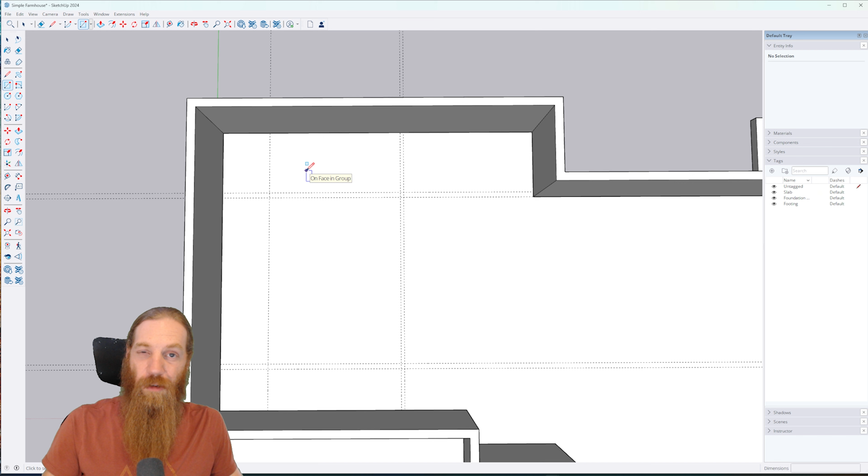So what I'm going to do is pull out the rectangle tool. It's basically the same thing as a line tool, but it will go ahead and build an entire rectangle for you instead of just one line. So what you do is pull the rectangle tool out with R. You can press R or grab it over here on the side. And then you're going to start in one corner.

So that's going to be one corner of our wall. I'm going to click, and it's going to start making a rectangle. I can make this rectangle any size I want. Because I already have these reference points on here, I can just go ahead and drag it all the way out to where it meets the other corners of the wall there. Click again, and it's going to create the rectangle. So now I have a rectangle there.

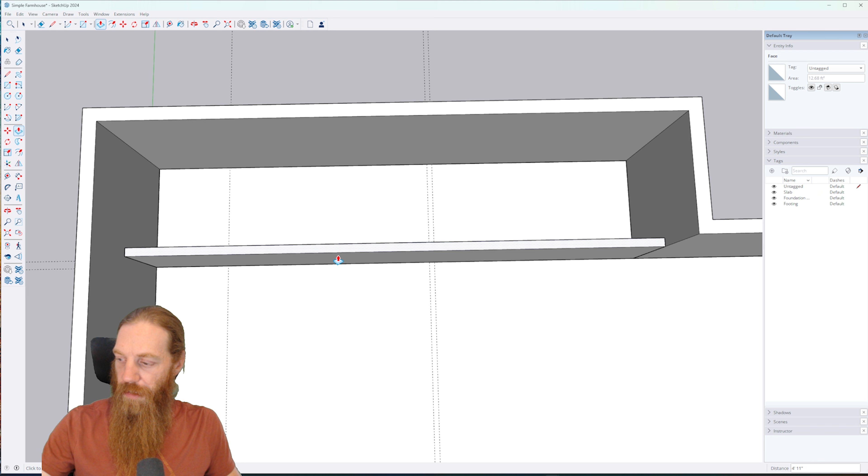I can use the push-pull tool by pressing P, and you can see it's going to grab that and pull it up. For purposes of designing this, I think what we really want to do is go just like 12 inches for now. We'll do all of our walls 12 inches high. These are not going to stay in place, we're going to replace these with actual framing. But for the purposes of figuring out the layout, I want to go ahead and do this so we know what our layout is at least, and that way we can finish doing the interior footings and all that. So now we have that wall done.

Let me go ahead and triple click on that, make group. You triple click, then right click, and then select make group. I covered that a little bit last time as well.

Now this side, this half is going to be the bathroom, and this side's going to be just a storage closet, I think, because our depth is only going to be, what is that? Like 5.5 feet, right? So fine for a bathroom, not much good for anything else other than a storage area, a closet, that sort of thing. So we will have a wall dividing these two.

I don't know yet, let me think. I don't know where our plumbing is going to be per se, but we do already have this 2x6 wall here. So I'm thinking we're going to put all of our plumbing in this wall here. So this wall coming out could be just a 2x4 wall that separates these two areas. How far I want to come out, that's however big you want your bathroom to be and however big you want your closet to be, essentially.

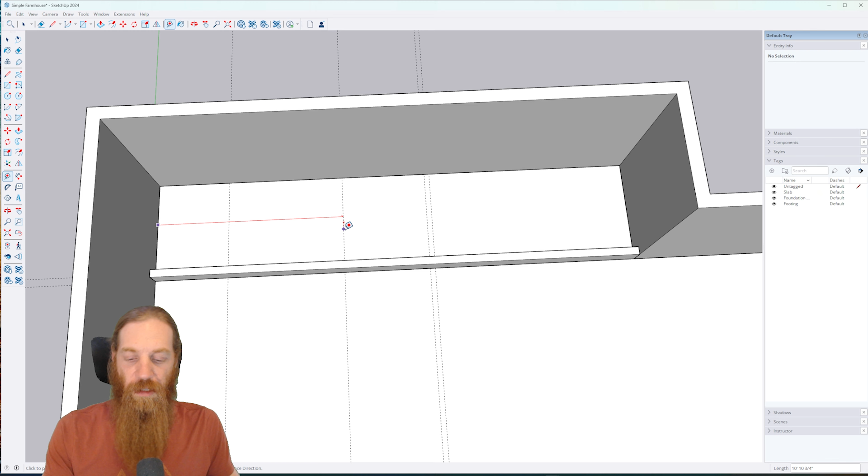So this storage closet is just going to be for the main game room area, it's not a bedroom closet. But because of that, I want it to be a nice and big walk-in closet so you have lots of storage, right? So I think let's just bring this out 10 foot.

And actually that's going to come out 10 foot, 3.5 for a 2x4 wall on the exterior, and then also the 2 inches. So we want to go 5.5. So let's go 5.5, so 10 foot 5.5 puts us there. And actually I want to move that, I do want to account for that. I'm trying to make the bathroom exactly 10 foot once it's finished, so we also need to account for drywall. So let's move this over 1 more inch. That should give us 10 foot, 6.5 from the foundation wall to there.

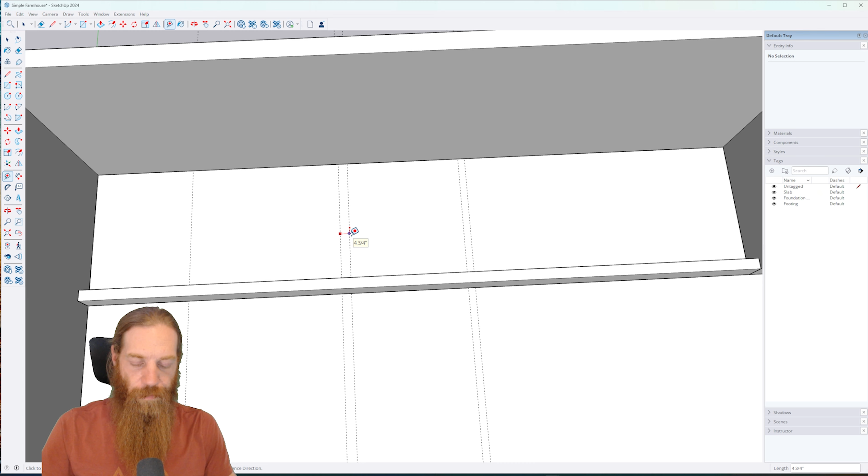So that should be right. Let's go ahead and come over. Like I said, it's going to be a 2x4 wall for the interior wall there, so we'll just do that. And then again, I'll use the rectangle tool by hitting R. We'll click onto that corner there, bring it down to this corner, and then P to push pull, and we're just going to match the height of that one, which was 12 inches. Triple click on it, right click, make group. So that's going to be it, and we can always move that if we decide we need a little more room or a little less room in the bathroom later on.

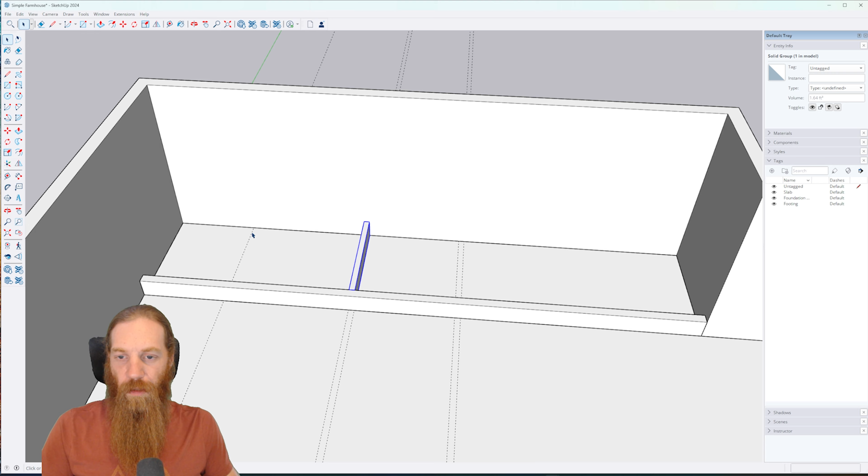But for now, that's going to be the basic layout of it. Now, at this point, I don't need these reference marks anymore. That one is for the landing at the bottom of the stairs, I'll leave that one for now, but I don't need these ones, so we can get rid of those.

Let's go ahead, and I know this is going to be a wall going all the way across, so let's go ahead and build that. We're going to hit R for the rectangle tool again. We're going to hit that corner right there, because that's going to be the corner of our wall at the end, and drag, and we're going to bring it all the way to the other end. Click again, P for push pull. We're going to pull that up 12 inches and then make that a group.

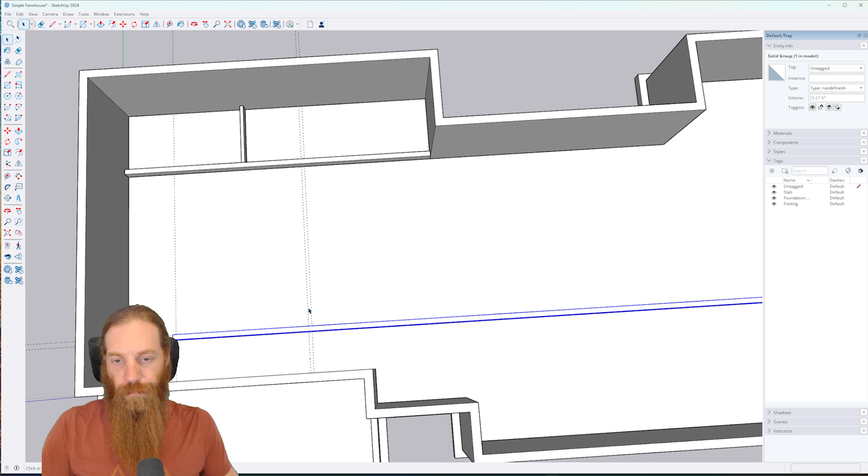Okay, so now we got that wall done. I guess I can go ahead and do this here, that's where we think it's going to be, the wall for the end of the stairs. So let's just go ahead and do that.

Make group. Okay, and we'll just leave it at that. The rest of this down here, I'm not going to worry about right now. We're just going to leave it open, and then I'll figure out the stairs and the landing when we do the stair framing later.

So now click out here, we can go ahead and get rid of those reference lines, and I guess I really don't need this reference line anymore either. Okay, so that cleans things up a lot.

So now we've got the rest of the space that we want to figure out what we're doing with, right? My idea was we come down the stairs, we're in a big open game room area here. You've got a bathroom over here in the corner, which will have a door facing out into the game room. So we might actually change that by adding a little hallway right here with the door going into the bathroom from in a hallway.

Usually that's the better way to do it. It would be slightly more expensive to build it that way because you're using a little bit more materials and a little bit more labor, but it's going to be very minimal. The only issue is that you will have to leave a beam going across the opening of the hallway in order to support the floor joist above, because we are using this wall as a support wall. So that's something we'd have to consider.

I'll consider that later. This is really going to be just like a powder bath. I probably will design it with a tub and shower combo in there, just because of how much space we have. But I don't expect this bathroom to be the main bathroom that's typically used.

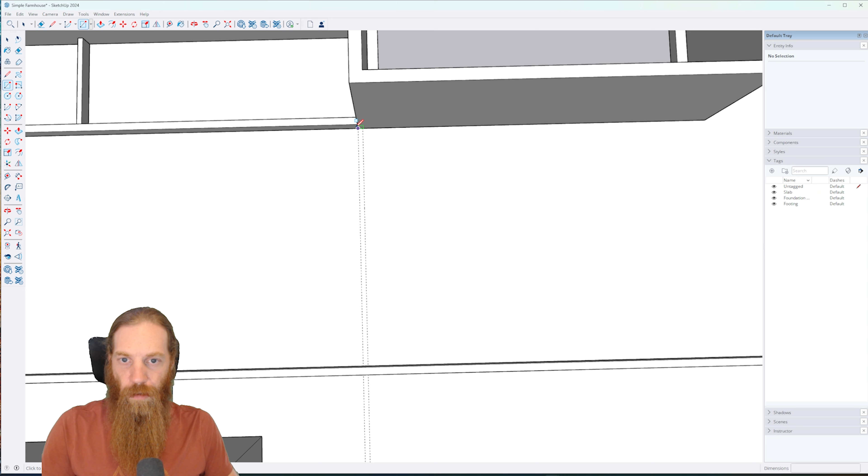So let's go ahead and mark that. We'll just continue what the foundation wall already was giving us. This is going to be a 2x4 wall, so we'll come over 3.5, and R for rectangle. I need to figure out how far out that's coming first.

So our hallway here, I want to do a 4-foot wide hall, because you are going to be moving furniture through this hallway for the bedrooms that are going to be in this back section of the basement. You want to make sure you have plenty of space there. So let's go ahead and come out 4'1".

Did I hit spacebar? I accidentally hit spacebar. The 4'1" is going to allow for the drywall and still give you 4 feet of clearance from side to side for the width of the hallway. So let's go 4'1". I also could have just typed 49 inches, either way works. And then this wall is not load bearing, so again, we're just going to go 3.5 inches for that.

I was thinking this room would essentially just come all the way down to, again, the end of the wall there. So let's bring it to there and then bring this back 3.5.

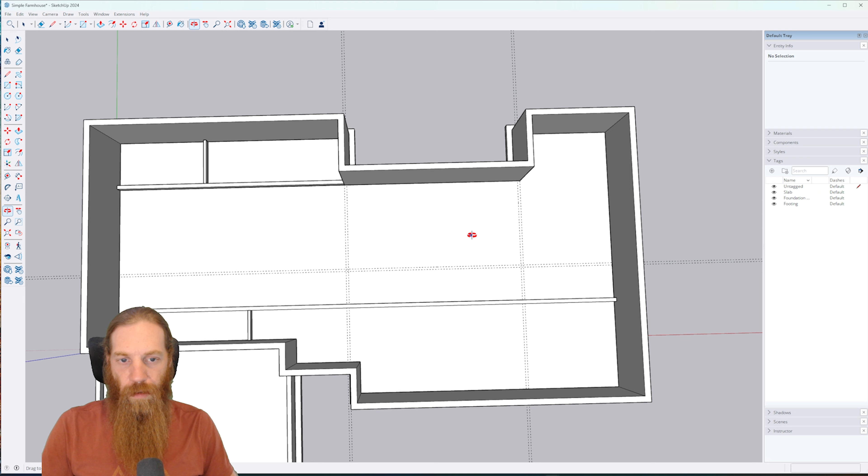Okay, let me think about that for a second. I'll be right back.

Okay, so I think that's more or less where it's going to be, but we may move that wall back just a little bit to make this hallway that turns the corner a little bit wider, and I'll show you why. The important thing we want to get in the layout first is usually where our plumbing is going to be, right?

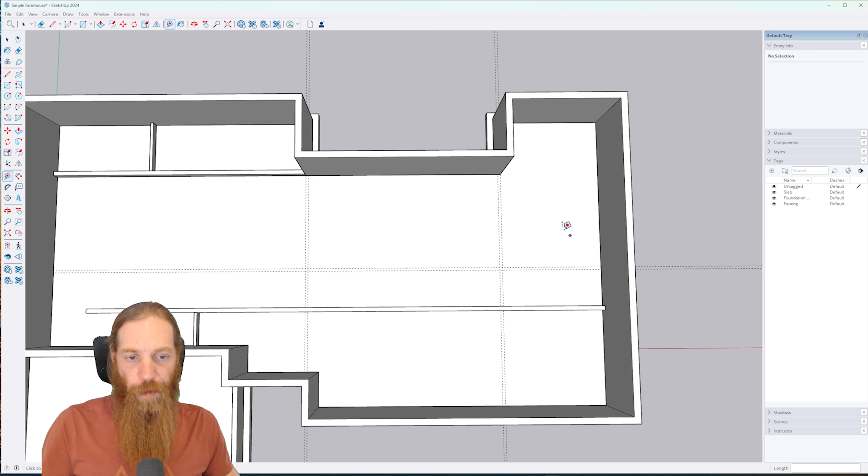So in this case, for the basement, we need to figure out our bathrooms. Now, we already know one bathroom is going to be up here, and we know the other bathroom's going to be over here in this general area. I think what we'll do is essentially just copy the bathroom from up above, because it's really not a bad little plan there.

Yeah, so we'll just go like 6 foot wide, and then we'll have closet on each side, bedroom, bedroom. I think we're going to copy this wing of the house essentially from the main floor straight down to the bottom floor. We'll just have hallway, bathroom, closet, closet, bedroom, bedroom. The closets are nice for separating the bathroom from the bedrooms because they buffer the noise, which is really a big plus when you have a bathroom right next to the bedroom. So you want to buffer that a little bit, so I like having the closet built in right between there.

And that bathroom is going to be plenty big enough for a basement bathroom, so let's go ahead and go with that. It's going to be 6 feet, and then we need to come out. How far does that go? 8 foot from that wall, and then we added the 2 feet there, so 10 feet. So it's going to be a 10 by 6. That's exterior dimensions.

We could alter that a little bit. So they have a load-bearing wall there. Yeah, that makes sense. We'll probably do, I think 10 by 6 is probably about right. So 10 minus the 8 inches for the foundation wall, because they are measuring from the exterior of the foundation wall, right? If we go to our 2 foot out, 2 foot out comes to the exterior.

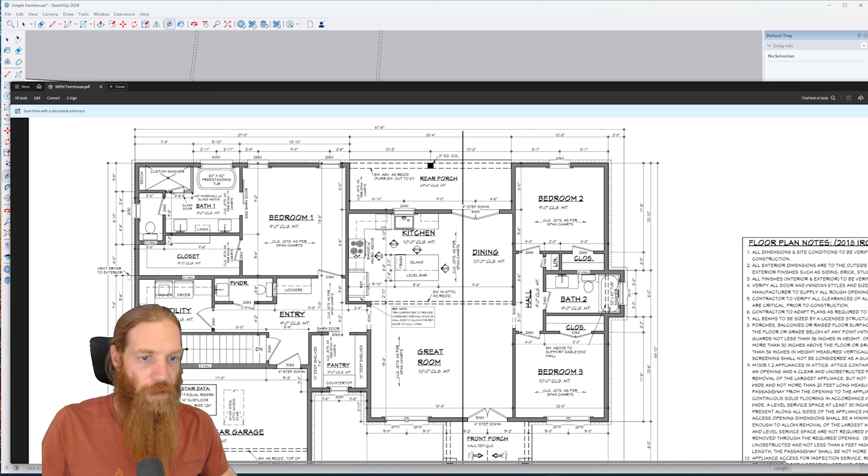Yep. Okay, so what did I say? 10 feet minus the 8 inches, that's going to put you at 9'4". So we're going to come over 9'4". Where does— I did the wrong, sorry, hit the wrong key. 9'4". Okay, that brings us over to about there. It's not bad, and that looks like that takes us to the center of that wall there.

Actually, the way they have it on here, it's a little bit odd to measure to the center of the wall, but okay. We can do whatever we want, of course, so not a big deal there. Although we do want to leave room for the hallway to get into there.

That's interesting. How does that not fit down here, but it fits on the main floor? I have no idea. You know what? Let's change that. So I'm going to take that, delete it. We're going to instead—I think I want to measure off of this wall.

So we want our hallway to be, let's go 36 inches in this direction, because I don't want to encroach too much on the bathroom. And then what I'm going to do is move these 2 lines over another foot. Whoops, no, I want to move them over 13 inches, so that our total width of the hallway there will be just like the other section. It'll be 4'1".

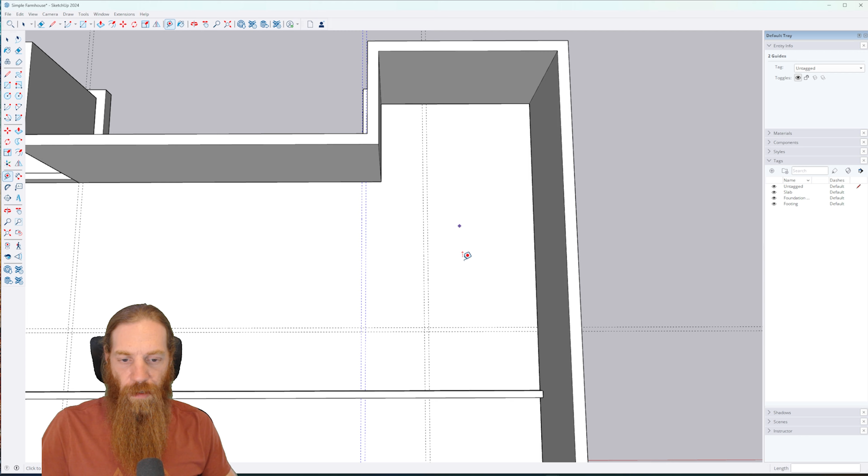Yeah, okay. And then let's see, the bedrooms—how big were the rooms? So they're basically doing a 12 by, what is it, like 11 and a half? 12 by 11 and a half room. Okay.

So let's go ahead and keep that wall where it is. Up here, we need to go 11.5 this way, so we'll just do 11.5 feet. And then what if we do 5.5? Oh, do I want to do 5.5 off that one? I don't know. Yeah, let's go ahead and do that.

Okay, so that leaves us with the bathroom width, 9 foot. 9 by 7.5, basically. That's not too bad.

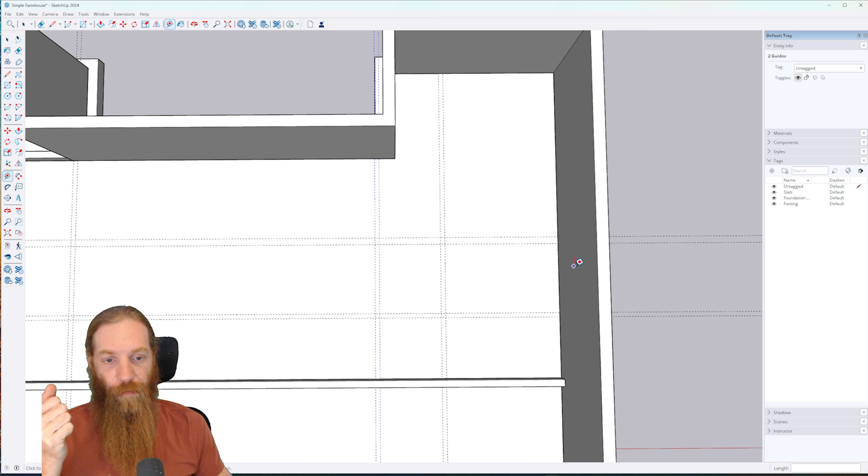9 by 7.5, so we should be able to do like a 2-foot closet, linen closet, and then have the shower, and then we'll do a vanity and toilet on the other wall. Yeah, I think that makes sense.

I think that works. And then of course we're gonna have to have our closets in here. So let's go 24 inches for the closet. Actually, sorry, 25 inches because you got to include drywall. So we'll go 25 inches, and then a 2x4 wall, so 3.5 inches there.

And what about this one over here? I do want a closet there to separate the bedroom from the bathroom. The other thing is I'm trying not to put the load-bearing walls where the closet door is going to be. I'd rather have that as the wall that separates the bathroom from... Maybe I'll move that then. I think that's pretty good though.

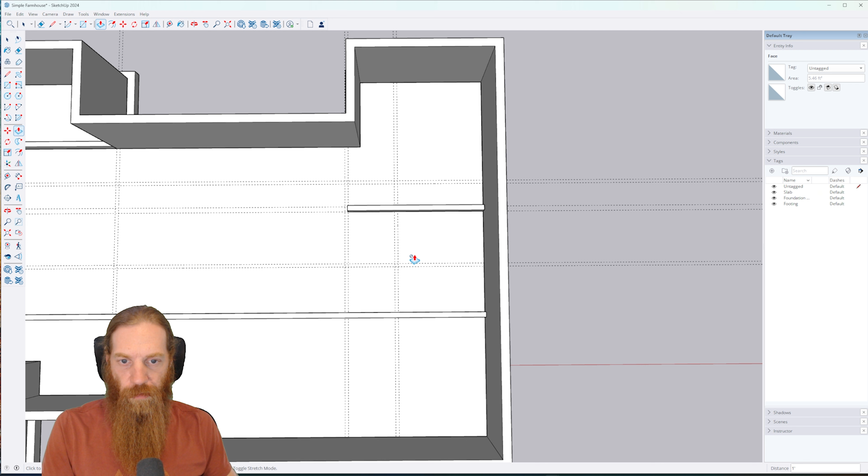So let's go ahead and go with that. I'm going to go ahead and design this out. So we'll use our rectangle tool again, and we're going to do a 2x6 wall there. Push pull that out 12 inches, make that a group. And then we had a 2x4 wall here, and that's going to come out to here. We'll make that 12 inches, make that a group. Okay, rectangle tool again.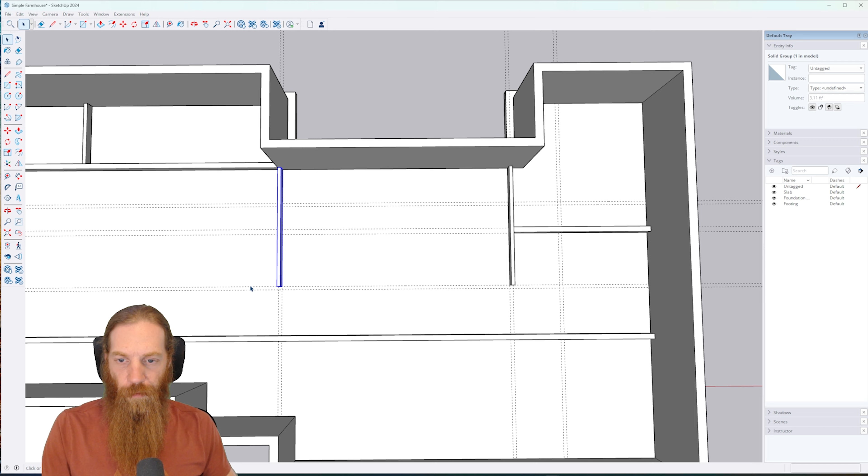We'll do this wall here. I'm just going to try and get most of these walls in place now so we can really see the layout. It was not letting me go over to this one, so I just came over here and clicked on that to get it 12 inches. Make that a group. And then we have this wall coming across here. Let's go ahead and pull that up 12 inches, make group. Okay, and then we have the bathroom wall here separating it from the hallway. So let's go ahead and do that, make that 12 inches, and make that a group.

Okay, so right now you're looking at bedroom, bathroom, probably a media room is what I'm thinking, because you're not really gonna have any windows in this wall. It's gonna be a nice dark room. I feel like that would make a good media room.

Let me know, what would you do with that space right in the middle of the basement? I think an excellent theater room, media room, gaming room, video games, whatever for the kids, that kind of thing - a great room for that. It's right next to the game room, but it's separated so you won't have the noise. I think that's a good spot for it. So let's go with that.

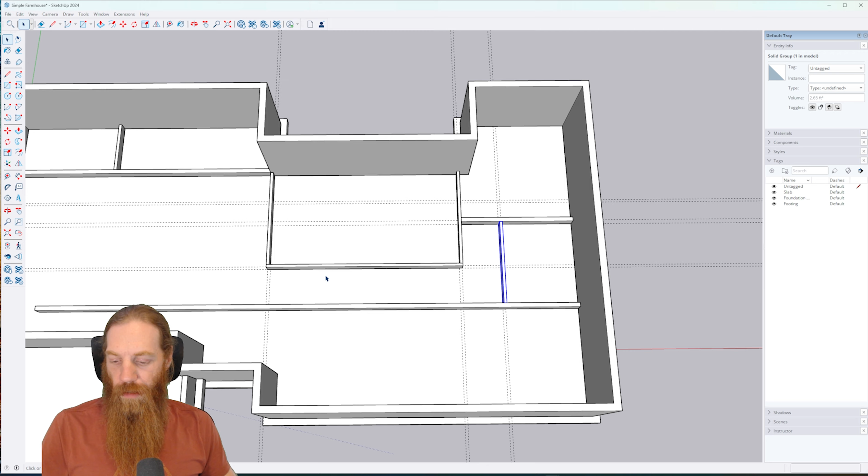And then down here for this bottom section, this is the last area we need to design essentially. Well, let's see, so we have the closets - do I go ahead and put the closets in now? It's kind of a funky space here with that closet in like that. So it's only 9 foot 1.5. It's a little bit of a smaller room, especially because we haven't built in...

So because this is a basement, we're actually going to have 5.5 inches off of all these walls. So it's going to be like this - 5.5, and that's because we're gonna have 2x4 framing there, but you're also gonna have 2 inches of foam board that's behind the 2x4 framing. So total, you have 3.5 inches plus the 2 inches of foam board, 5.5 inches. That's why I'm coming out from all these walls 5.5 inches, essentially to represent where the finished interior walls are going to be along all of those exterior walls.

Yep. So not a big room by any means. If I could fit the closet in somewhere else, that would be really nice. But like I was saying before, I do like having the closet there to separate the bathroom from the bedroom.

Can we... I'll have to think about that. We may change that a little bit.

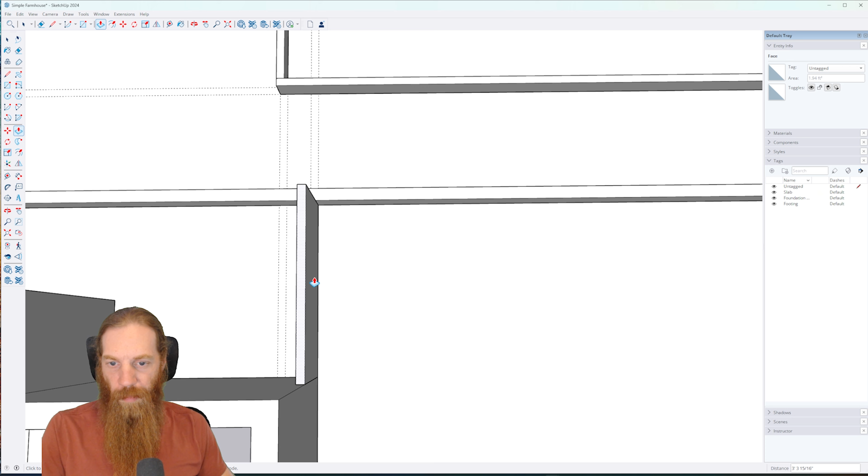But anyways, down here, I want to make this into 2 rooms, basically - one room here and another bedroom here. So let's go to here, and then this comes back 3.5 because we have a 2x4 framed wall there. So we're going to make this into one big rectangle of a room, bedroom here on the right. Make that a group. So we got this as a room, and then this will be a room, so we need a divider in between there. Now, should we just simply divide the rooms in half?

What's our total measurement here? Because this is where our interior wall is going to be, as I was just explaining. So we have 30 foot, 6.5 inches to that point. So we could go 15, 3.25 would be our center.

Now for the closets, I was already saying I'd like to put a closet up here to separate the bathroom from the bedroom. So if we put a closet there, that takes care of this bedroom's closet. This bedroom would still need a closet.

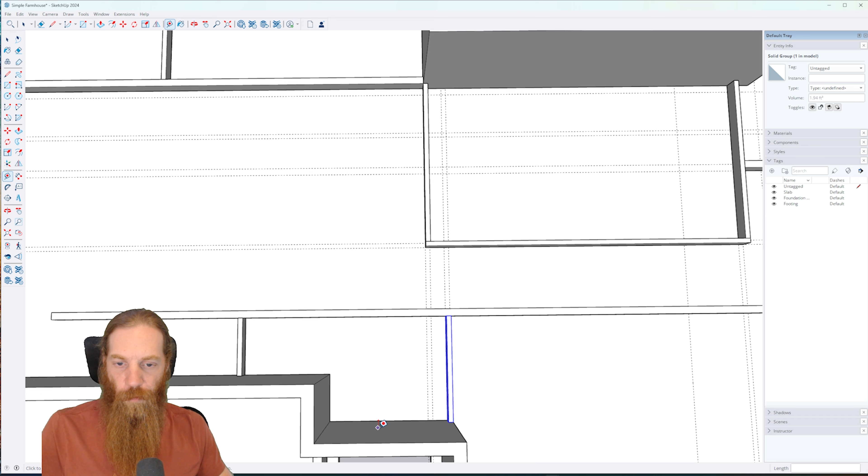Now we could either make this space over here the closet for the bedroom, or we could add a closet separate along the separation wall between the 2 bedrooms and use this as a storage space off of the main game room, another walk-in closet area here for storage. So you'd have storage space up here and storage space down here.

I like having lots of storage space. I certainly make use of it. I'm a little bit of a pack rat sometimes, so I like having extra storage space. I assume most people do.

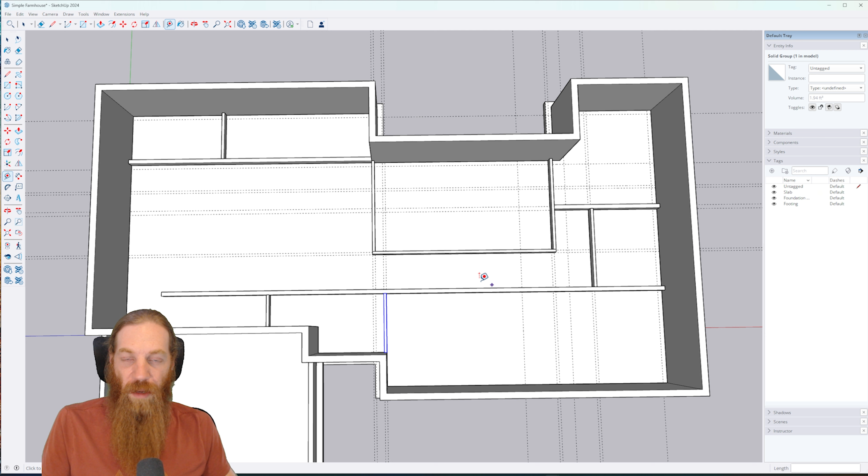I don't know that you need a giant walk-in closet like that for this bedroom, which will essentially be a guest bedroom or maybe even an office or something, because you're going to have a lot of bedrooms here in this house.

Yeah, it's really hard to say. I do like the idea of using all the space under the stairs as well as a continuation of this storage space if we can. So we may not put a wall right here. It may just have the stairs going up and then you have storage space under the stairs. So maybe we want to actually delete that wall and get rid of that.

And we just leave it over. I'll just leave it there for now. Actually, I think that's fine.

So let's leave this as another storage closet, and let's actually put a closet in over here for this bedroom.

The way I want to do that, it's going to be a 2 foot wide closet, 25 inches actually, on the interior space for the framing. So do I want to cut that into which bedroom, or do I want to center it?

We're already going to have a cut in this bedroom for a closet there. So I'm thinking we cut that 2 feet into this room.

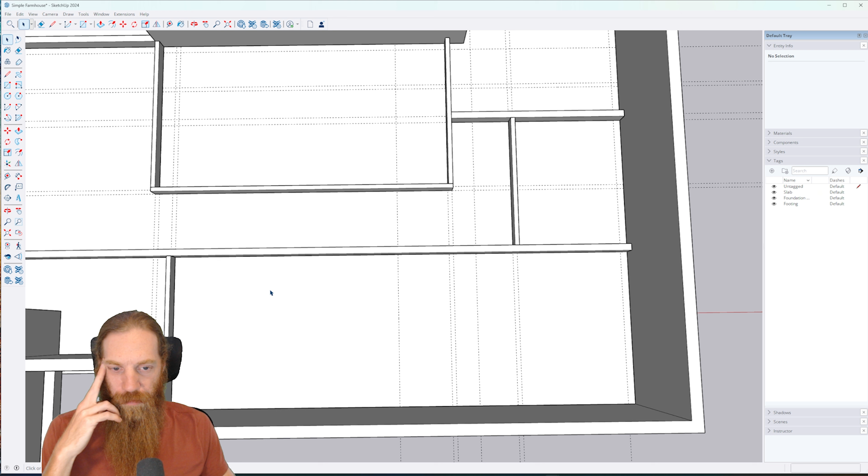So if we do that, let's come off this line. We'll build the wall this way, so 3.5 that way. And then from there, we're going to come over 25, and then another 3.5 there. I think that works. What does that give us for interior dimensions?

So the bedroom will be 12 foot 10.75. Basically 12 foot 10 by about 10 feet, because you got to come out 5.5 on this wall for that framing, like I was saying. That's a pretty good size room.

And then over here, you have 14 feet long by, again, the same distance, except that we're going to take 2 feet off of that for the closet in half of the room over here. I think that's going to work okay.

So let's do that. Let's go ahead and put the closet in right there. We'll come 25 and then 3.5. Okay, we got a lot of lines on there right now.

Let's do some walls real quick, and then we can call this good. So I'm going to do this. Technically it only needs to go to right there, I guess. So let's do that. I'll have to go back and change the other ones later to make room for that exterior wall, but we'll worry about that in a minute.

Make group, and then the wall right here for the closet. Okay. Make that a group. I also could have just copied this one and dragged it over. That would have also worked.

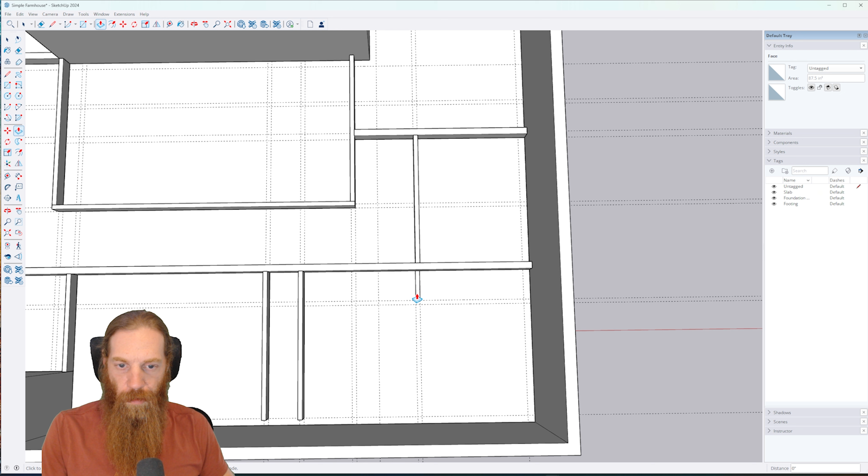And then let's do these ones. Make that a group. I'm gonna go ahead and do, oh, that's not what I wanted. Do this one here.

Make that a group, and oh, I was gonna do this closet up here as well. Okay, and then right here. Make that a group. Okay, there we go.

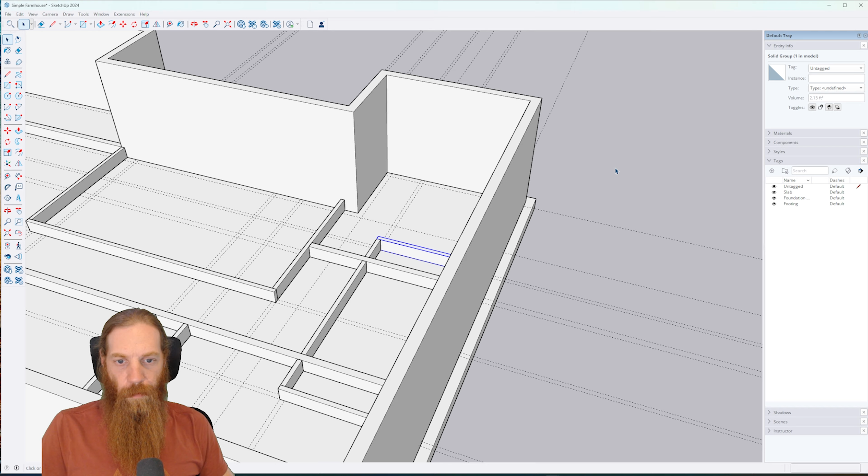So that is more or less what I think I want to use as the layout for a basement. Do I need any of these reference lines anymore? I do need some of them for the exterior walls. We have not put those in just yet.

Okay, let's leave it like that for now. Well, I could go ahead and take out some of these lines. So we could delete those. We can remove these ones. We can remove those ones. Definitely can take those ones out. We can also take these ones out. Actually, let's just... should I just remove all of them?

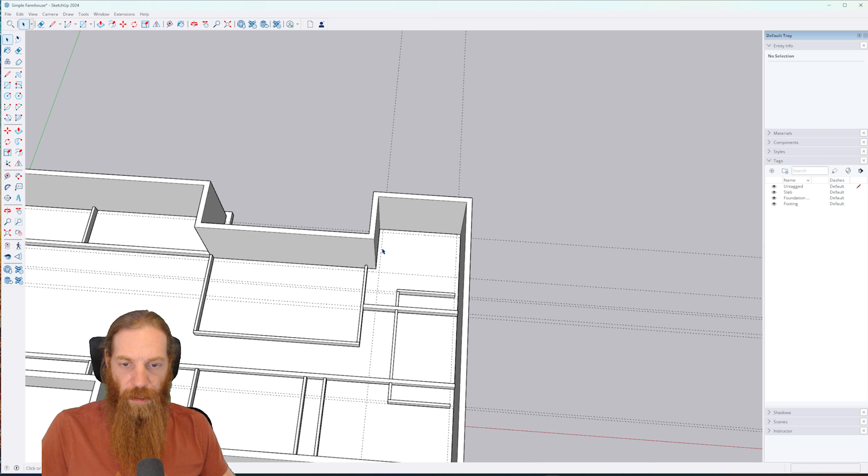We can put the reference lines back in for the... well, no, that'll save me time later if I don't do it. So let's go ahead and take that out, take that out, take that out. So we should now be pretty much just left with our exterior wall markers and reference lines. Looks like it. Okay, so I think we're good there.

Yeah, that's not bad. So we have progress. We have more or less figured out the layout for the basement. We still might fine tune it a little bit, but I think our dimensions are pretty good, right? For like a media room...

Let's do, so yeah, 10-foot wide for a media room. And then we'll probably put a closet in here because you kind of need a closet for a media room as well. But then it's going to be 20 feet long. So 20 by 10, that's a good size for a media room, right? So I think we'll go with that.

It's really going to be about 18 by 10 because we're going to add a 2-foot deep closet probably somewhere over here. Now, the smallest room that we have obviously is this one back here in the corner.

The key here is we want to make sure it's still going to meet code for a bedroom as far as size. So 8'8" by 9'11". So yep, that should meet code.

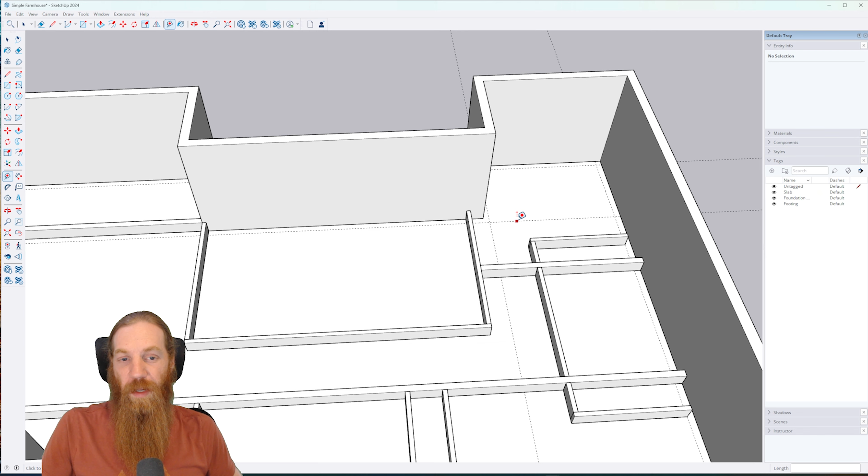Code basically says you cannot be less than, I believe, 7 feet in any direction. It might be like 7.5 feet or something. Basically, rule of thumb for me, as long as you're not less than 8 feet for any dimension of the main area of the room, then you're good, right? But most areas have some sort of minimum size requirements for a bedroom. So make sure you're aware of what those are for your area and make sure you're designing to those specifications.

Otherwise guys, I think that's going to do it for today. We covered a lot. We fixed the foundation, got that all set to where we wanted it more or less by doing the little alcove for the back patio deck area, and then also fixing the height of the foundation to where it will fit pre-cut studs for all this basement framing. And then we also worked on our layout for the basement. So this is a big step because once we know what our layout is more or less for the basement, we can go ahead and design our floor system above.

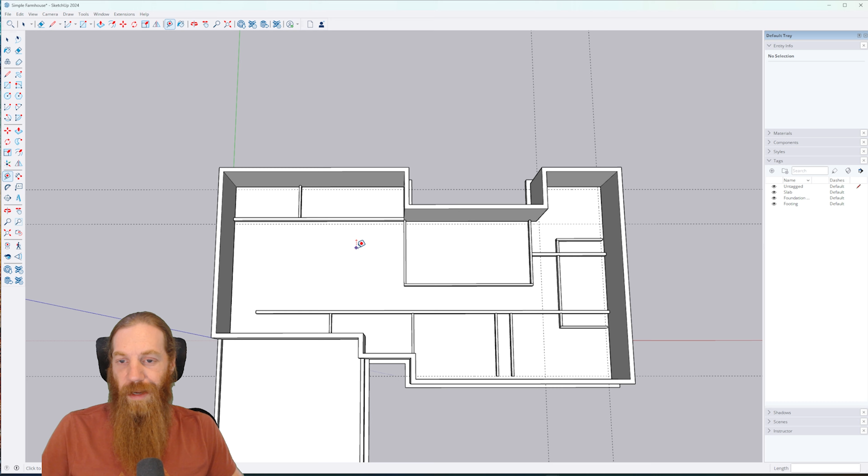Because we know where our load-bearing walls will be, we can go ahead and design our interior footings for the load-bearing walls under the slab. So we'll take care of that next time, along with finishing all the layout stuff. If there's anything else—I'm not sure there's really anything else to do as far as actual layout.

When we get around to actual framing, that's when we'll come in and actually frame all these different walls. So now that I think about it, we really don't need these lines right now, and we're not going to need them anytime soon because we're not close to doing framing yet. So I'm going to go ahead and remove all of those.